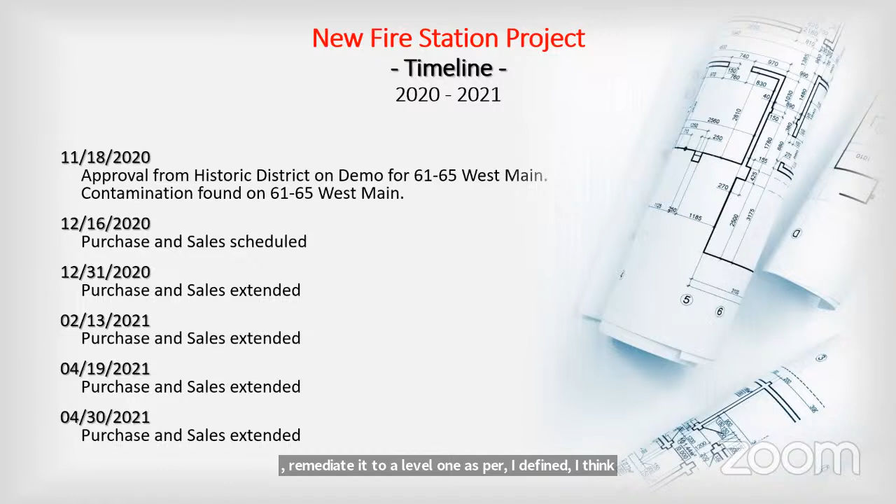At the time, the purchase and sales was drafted in such a way that the owner had to give us a clean site, meaning all the buildings had to be torn down. He could do it much cheaper than we could. And he had to remediate it to a level 1, as defined by DEP. So we had all these delays.

Finally, in 2022, the purchase and sales was executed for the property at 61-65 West Main Street. That was about 3.41 years after the town meeting approval. So it took us quite a while to get there.

We got to 10 Monroe fairly quickly, didn't take us a whole lot longer. Then the Fire Station Building Committee took a little bit to get up, but we had our first meeting in 2023 on 3/20. We hired our owner's project manager, who was Collier's.

And then we went through our process for an architect, and we hired our architect, who is HKT, represented here today. That was a little over 4 years after the town meeting approval.

So the timeline after that was, we started our program development, which was discussion with fire department leadership, survey of department personnel, space needs, that type of thing, and then began our schematic design phase. That included Fire Station Building Committee meetings and joint meetings with design review and master plan implementation and public input meetings, and then individual meetings with design review.

That led us to our next phase once we hit the end of schematic design, which is design development, which is where we are now. That again includes Fire Station Building Committee, Design Review Committee, ZBA committees, the meeting we're here for tonight.

So why do we need, that's how we got where we are. Why do we need what we're asking for? Well, the current station we're in was designed in '74 and occupied in '75.

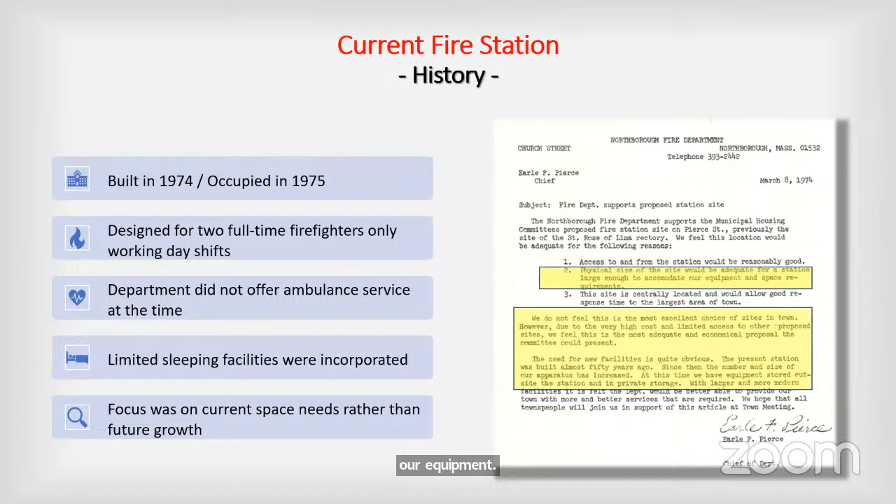At the time, they had 7 pieces of apparatus, and Chief Pierce stated we can't fit all these apparatus in our station, so they built a new one. Currently, we have 18 pieces of apparatus. We can't fit all these in our current station.

Quite a few of them are either out back or in the garage, or when myself or the deputy are there, our vehicles are outside. Car 3 is always outside. We just cannot fit them in the current station.

The ones we do have in the station look like this, and I think some of you have been down there and walked around and seen it's bumper to bumper. The only way to get from bay 3 to bay 4 is actually to crawl over the top of bumpers or open a door. We have equipment that should be stored in a secure area, our diving equipment, and it's stored in our back room with our water heater and our generators. That's another look at the front of the station.

One of the other big reasons we're looking for a new station is that many studies have occurred and they've determined that around 60% of firefighting line of duty deaths are due to cancer. And yes, we know as firefighters that when we take the job, we're exposed to all kinds of nasty stuff, and we understand that when we're on the scene, we're exposed to nasty stuff.

We follow a lot of the things that they indicate here that we can do. We make sure we're always wearing self-contained breathing apparatus. We have stuff on scene to clean ourselves off with, and we wash our gear. We have 2 sets of gear for each person. We have a gear washer and a gear dryer, and then we maintain records of every time someone's exposed.

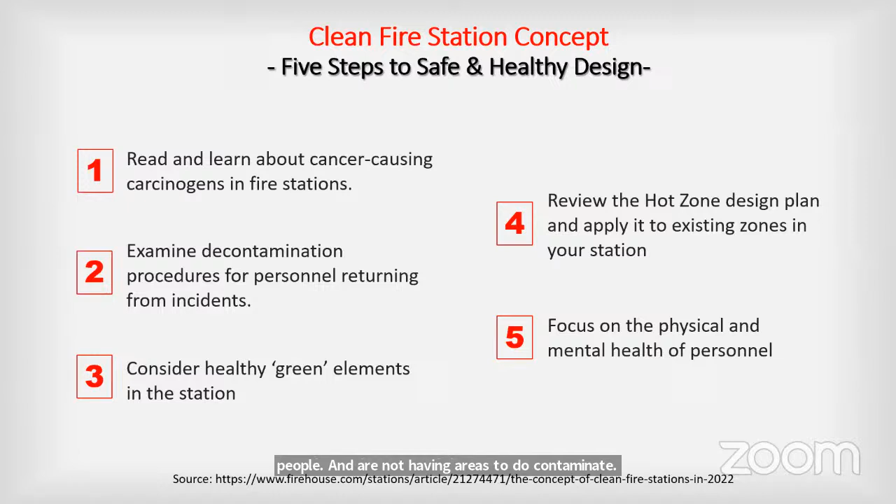That's the off-gassing of the turnout gear. That's the way the fire trucks start up and all the exhaust comes out and fills up the fire station, and people basically live in a garage sometimes. It's maybe not having good decontamination procedures for people, or not having areas to decontaminate, not having good healthy green elements, and not having a station that's designed with a hot, warm, and a cold zone.

So this is what a hot, warm, and cold zone looks like. This is actually the breakdown of our current, our proposed station. The hot zone is the apparatus area, and the areas to the left, that's the area where all the contaminants are.

The warm zone is kind of a transfer area. It's where our gear is stored when we're not using it. That's where our decon area is, where our training tower and our reports room are. This is where the firefighters are going back and forth from the dirty room to the hot zone to the warm zone. And then the cold zone is the administration area, all the living quarters. Those are all the cold zones.

These are not only separated by actual construction features, but they're also separated by airflow and by the way the station is designed, and the way the system is designed to move the air around and to keep pressurized areas. So I just wanted to clarify a couple of things that have been out there.

Some people are concerned, well, what happened to the plans in 2019 and how come you made it bigger? Well, we did make it bigger what it was in 2019. In 2019, it was 26,420 square feet. Right now, we're at 30,850 square feet. Several things led to that.

One of the big ones was we had to add an elevator. There was not an elevator in the original one. We're required to have an elevator. We're a municipal building, we have to meet ADA. We had to increase the apparatus bay size because it wasn't done correctly for the size of apparatus we had. The design was done with measurements off of our GIS system, not with a true survey. That made a huge difference when we did a true survey.

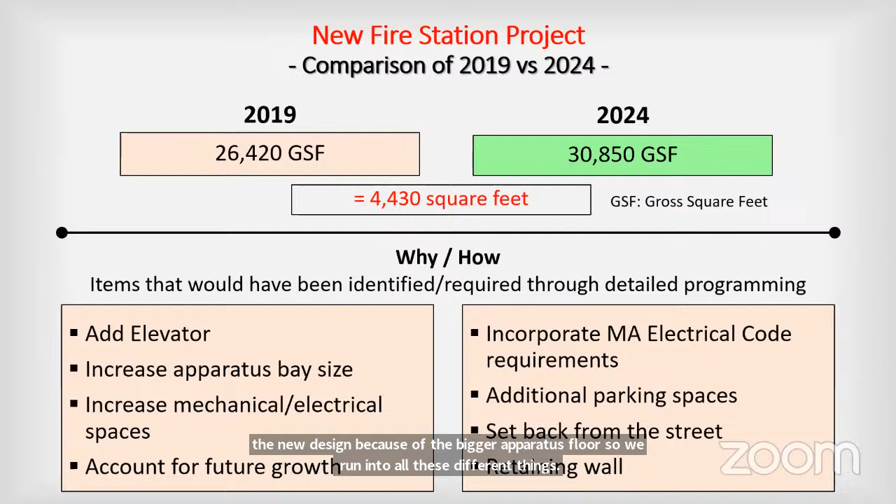What we've run into from 2019 till now is a new electrical code, the need for additional parking spaces, and a need for a retaining wall because of the new design, because of the bigger apparatus floor. So we've run into all these different things, and that caused some issues and some additional costs. So that's where we are now. Where we're going forward is we need to go through with the planning board. We have to finish up our design development and get a price on that.

Every time we move forward with a different section of the design, the price gets refined and tighter and tighter. During schematic design, we're very broad, and the cost estimators have to guess at some things because we haven't made decisions yet, and neither have they. As we go into design development, which is where we are now, we can get much clearer and tighter, and we're hoping to get those numbers closer.

We've developed the site, nb-firestation.org, which has all of our frequently asked questions, our progress updates, every meeting we've done, every presentation we've had. There's a lot of great information here, so we really recommend people take a few minutes, go here, see what we have, and that's the best source for information right now.

And that is my presentation.

Great, just to give you a little background, thanks for walking through that, that was great. Is it Amy? Are you presenting the site plan itself? Actually, Jim Jackson from PAR will be presenting the site plan. I'll present the architecture when we get to that.

Good evening, my name is Jim Jackson, I'm with PAR Corp, I'm a managing engineer. We're doing the civil engineering site design on the project. Also have Nicole Capistran, project engineer with PAR, available too. But I'm going to go through the civil plans now.

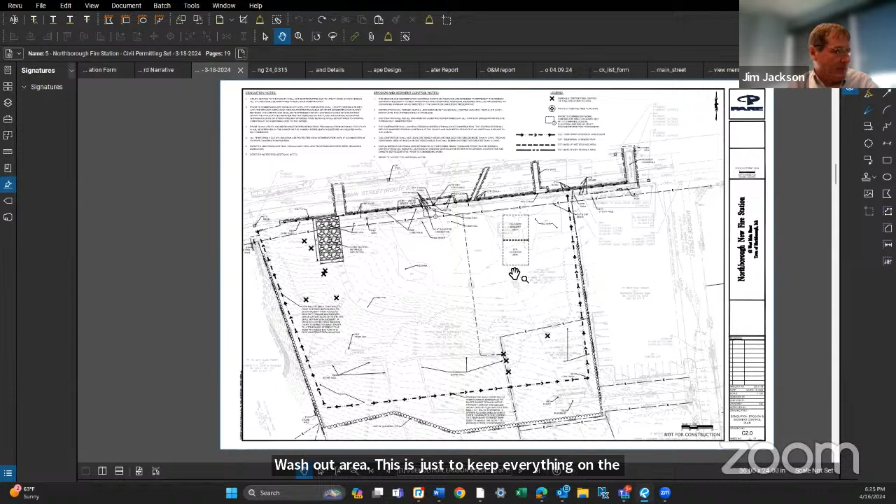This shows the general plan. So here's the 30,000 square foot building. The portion on the east is the apparatus bays, so we show a large apron for the apparatus to easily maneuver onto West Main Street. And then on the west side of the site will be the administration portion of the building, living area, that kind of thing will be on that side of the site.

And the site will be limited on the east, we'll just limit it to authorized vehicles. Fire apparatus will be able to exit the apparatus bay in the front. They'll also be able to return and drive through a back door into the bay and be set up to respond to the next call. Most of the vehicles will be able to do this drive through, except the large ladder trucks, which will have to back into the bay from the slab out in front at West Main.

The parking for the firefighters will be on the east side of the site. We're calling for 23 employee spaces, so we have 16 on the east side, and then a few more on the west side that will be used by staff. We're also showing 30 spaces on the west side, these will be for visitors and also for the public, so there'll be some public parking for people just accessing downtown. They'll be able to park here and then walk to the various downtown areas.

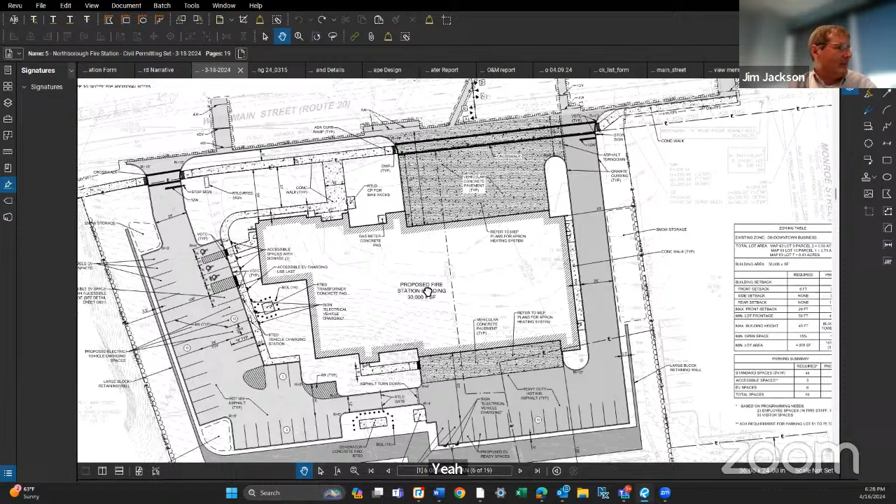We're also showing a dumpster enclosure on the back of the building area. And we are also showing sidewalks. We have them set back from the edge of the road about 9 feet in this area. We also are tying that sidewalk in the way we're showing it now into the sidewalk at the hillside grill, and that's open to some discussion. We've gotten some comments on that, so we want to discuss it a little more later tonight.

We did go through the zoning table, and we have gotten some zoning variances. One is for the setback from the front. The maximum allowed is 20 feet. We're actually going to be 39 feet back to give us some room for the apparatus to be out on the slab in front of the apparatus bay, so they're not approaching right into the street. And we have received approval for that.

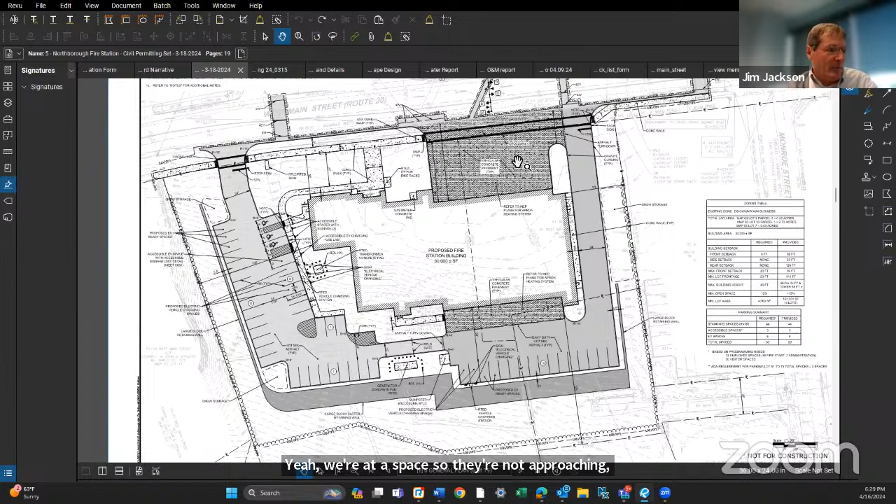General plan, that is that plan. Now gonna move to the drainage plan. So we did do a full stormwater analysis, and we submitted a stormwater report. I'll walk through the plan and show how we're accommodating the stormwater on the site.

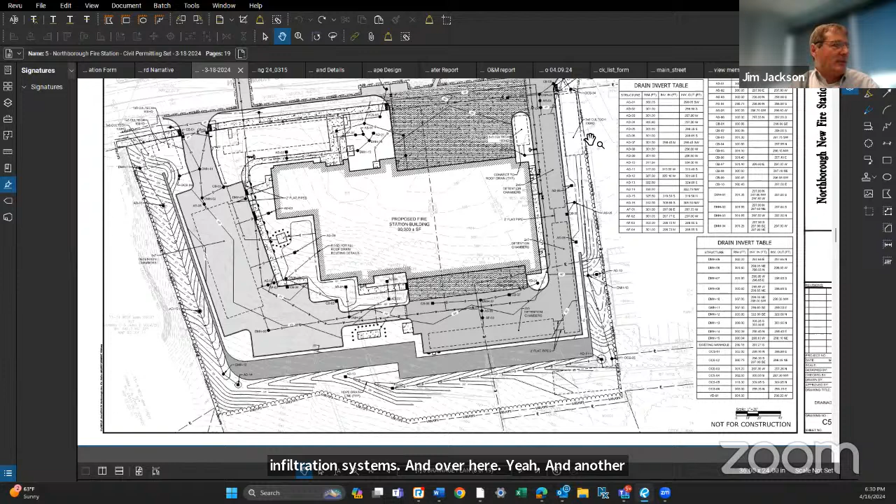So we did try to infiltrate to the maximum that the site would allow. We do have some issues with groundwater, but we were able to provide 3 underground infiltration systems, one over here, one here, and then another one here on the property line with the bank. And then also to reduce the rate of flows leaving the site, we added some underground detention chambers where we couldn't make the infiltration work in those areas. We have about 6 of those locations.

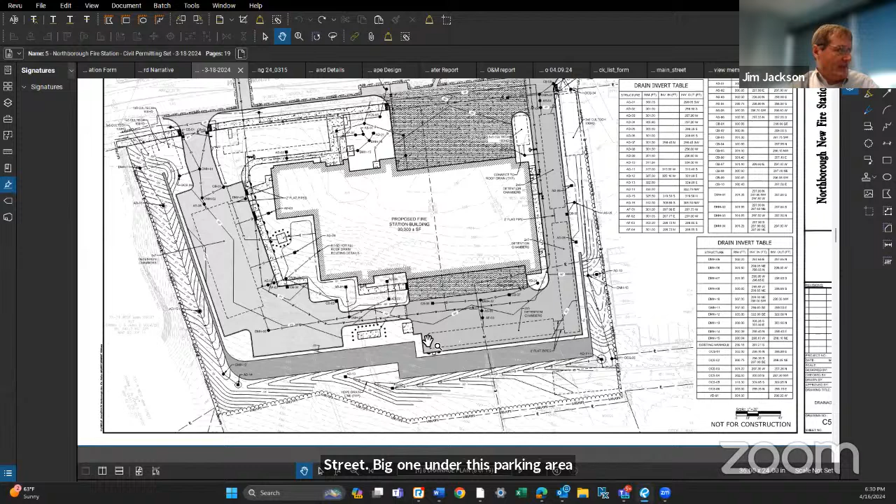Out along West Main Street, a big one under this parking area, one under the employee parking, one up the hill above the retaining wall, and then 2 on this side here. Those will help detain the flows leaving the site, so we'll be able to maintain the peak flows leaving the site under various storm events to below what the existing conditions are, so we don't put any strain on the off-site properties with stormwater.

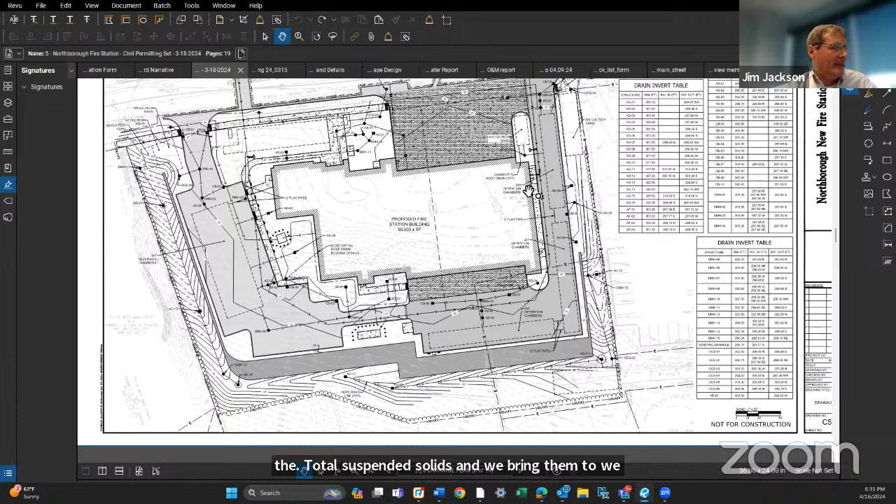And then to treat the stormwater, we do have the infiltration, but we also are showing Aqua-Swirl units before they go into the detention and infiltration systems. What those will do is there's a swirl system that will remove the total suspended solids, and we bring them to exceed 90% removal of the TSS. We've also included Aqua-Filter units, which will remove the phosphorus, and we're able to remove the phosphorus to over 80% leaving the site.

Which covers the stormwater system in general. And we do have a full report, a stormwater report, that shows the results.

For site utilities, for water, we're going to loop the water through the site on the back and then back out to West Main Street. And we have 2 hydrants on the site, one here and one here. And then we have our water service, fire service here, and domestic service here.

Sewer will be leaving from 2 areas. We have a sewer coming out of the apparatus bay, and then one coming out of the administrative side, and then they'll combine in front of the site and tie into the municipal sewer system.

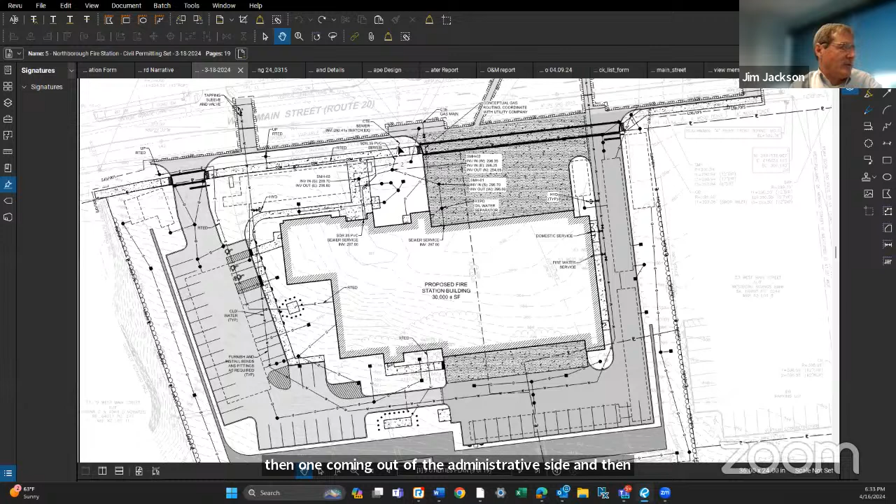We're also showing electrical will be underground. It'll come off the pole at West Main Street, underground to a transformer here, and then into the building. We also have a generator behind the building. We're also showing a gas service constructed by the gas company, right out front here.

For the civil plans, that's pretty much covers it. That's the plans, and then we have about 10 detail sheets showing some of the site details, the infiltration systems, and things like that. I can go through those and then ask a question. Just going to keep it at a higher level right now.

Amy, do you want to take over with the architectural? Sure, do you want me to call them up? Yeah, if you don't mind, if you've got them right there, that would be fine.

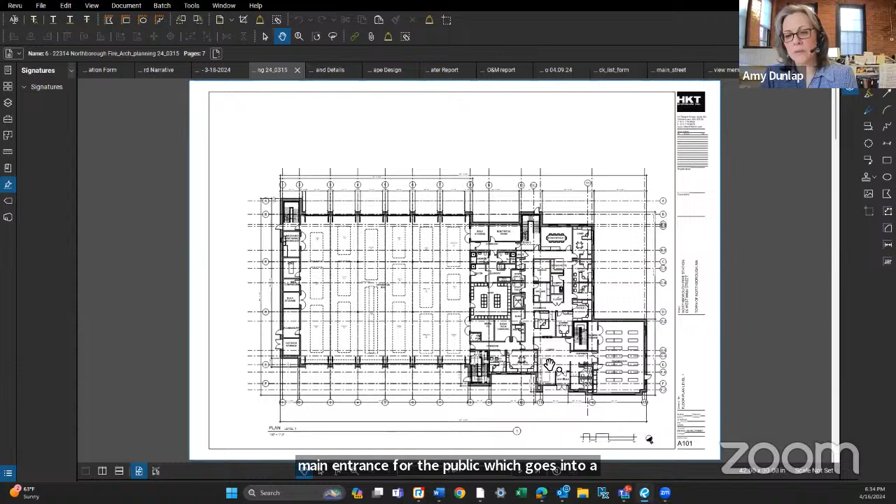So this is the first floor plan of the fire station, and the chief gave a little bit of an introduction into the way it's laid out. The entry for the public is right there - the main entrance, which goes into a vestibule and into the lobby. That is the public zone of the building. Off of that, there's access into the training room, EOC room, and some public toilets.

Beyond there, it's locked down, and you would have to be let in by the fire station staff. There's a window right there to speak to the administrator if you need help from the fire station. The rest of this floor on the right-hand side are all the administrative offices for the fire department. Moving towards the left, you get into what the chief was describing as the warm zone - a lot of the support spaces for the fire department, places like gear storage, decontamination showers, and various storage rooms and work rooms along that zone.

And then there's the apparatus bays. There are 6 bays - you can see we've got a layout of the trucks shown here, 5 of the bays where vehicles would be parked 3 vehicles deep, and then there's 1 bay that has 2 vehicles deep. That's where the ladder truck is parked.

Most of the trucks here in the bays aren't really drive-through. They're talked about as drive-through a lot, but the reality is the 6 vehicles facing directly out into Main Street tend to be the first responders. They go out first and go out the front of the station. When they return, the building's been set back so that they can back into the station without having to stop traffic on Main Street. They can do that maneuver right on the apron.

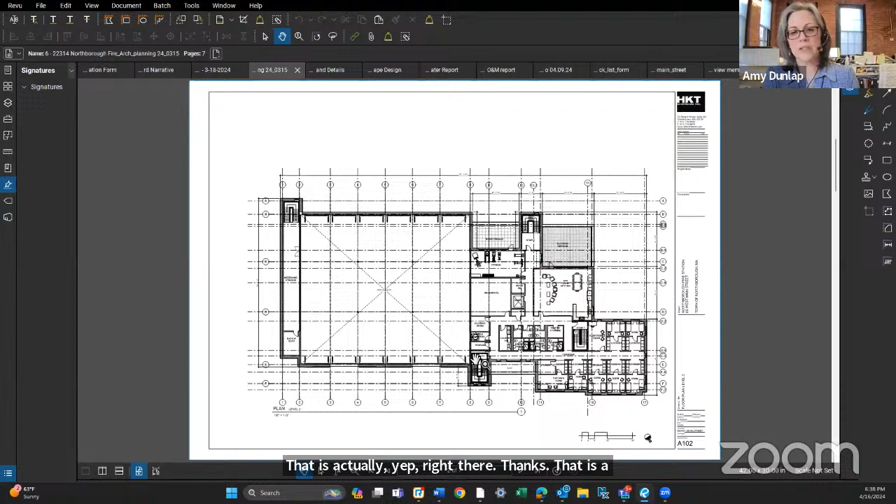In the front of the building, between the apparatus bays and the administration, you see a stair - that is actually a hose drying and training tower for the fire department. When we look at the elevations, you'll see that's a taller element, and that's because the height is determined by the length of hose they need to hang in there to let it dry. They'll also be using it for practicing and training for different exercises. The next drawing, Jim.

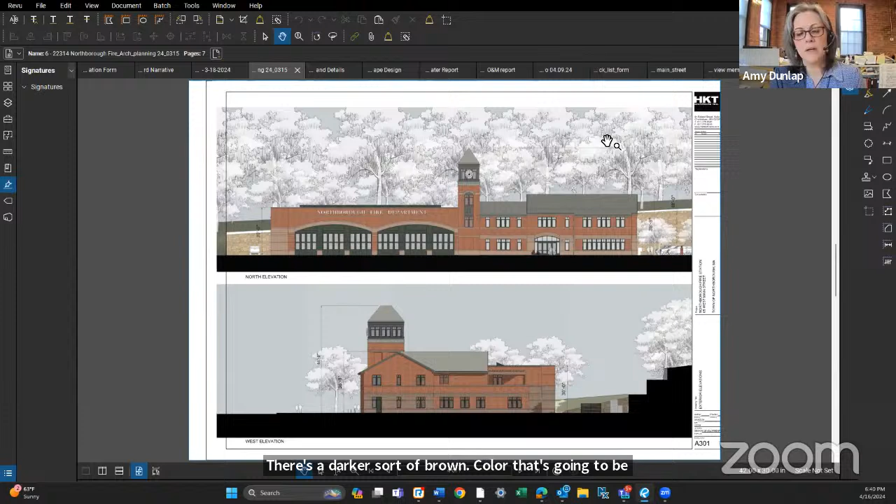The elevations, you can see it's all masonry. We have two different masonry products that we're proposing putting on the building. We presented some options to the committee, and they've selected two different brick colors that we'll be using. There's a darker brown brick color that's going to be the base material, and then the banding that goes around the building. We've got these horizontal bands that tie the different elements together, and then some arches which highlight the main public entrance into the building, as well as arches over the apparatus bays to highlight those there.

And we repeat that arch element on the tower to try to tie those various pieces together. We can go to the next slide.

In the upper drawing here is the south elevation. So that's what you would see from the back parking lot area. We've simplified that elevation a little bit. We're not showing the arches back there because it really is only going to be seen from the back parking area, and so that was a cost saving element that the committee chose.

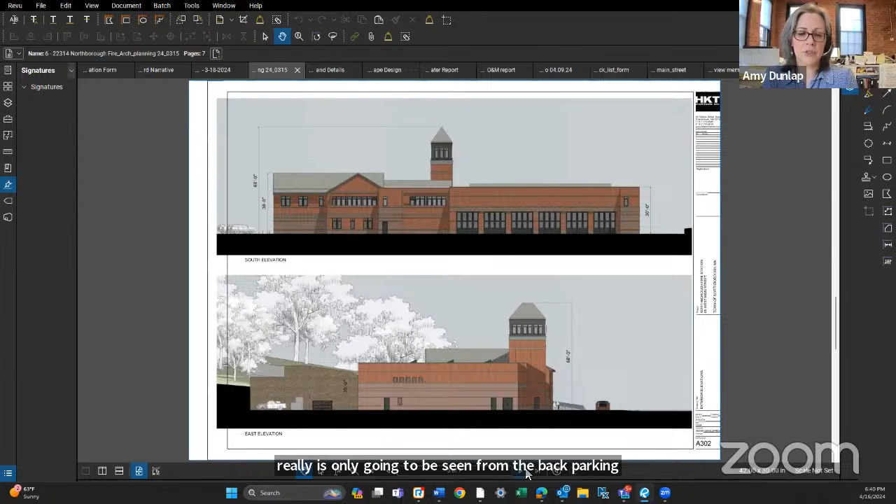And then the bottom elevation there, that's the east elevation. And that is an elevation of those storage and mechanical spaces with the mezzanine space up above. So there aren't a lot of windows there because the spaces behind it don't really allow for a lot of windows into the storage and mechanical spaces.

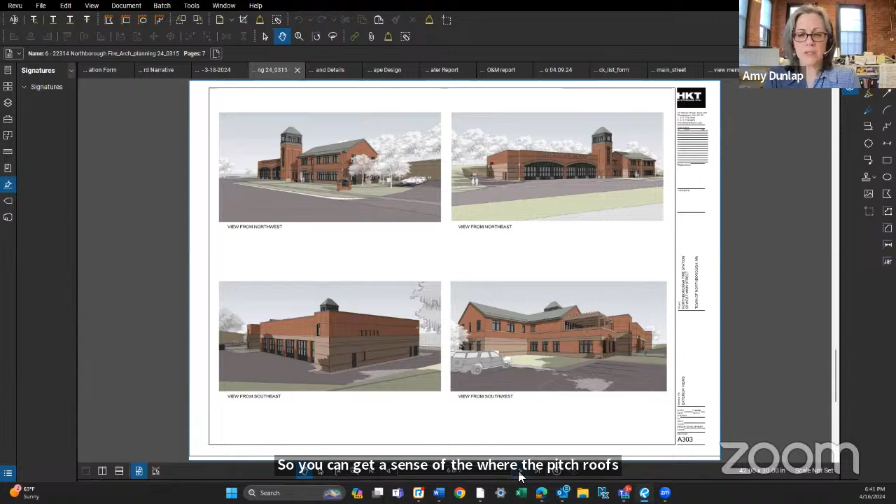And then the two bottom 3D views are from the parking lot areas. So you can get a sense of where the pitched roofs are, where the flat roofs are, and then where those roof decks are that we talked about. The next drawing, Jim.

Next drawing, Jim. I think that might be it for the landscape. Yeah, I think that's it for the architecture. We do have the landscape plan. Before you go to the next one, I think Mark is in the audience. Do you want him in with, is he part of your team too, or no? He is part of our team, but he was just going to listen in today. Thank you. Sure. All righty.

Go right ahead if you want to share the landscaping. Okay, sure. Yeah, I'm Ray Dunetz with RDLA.

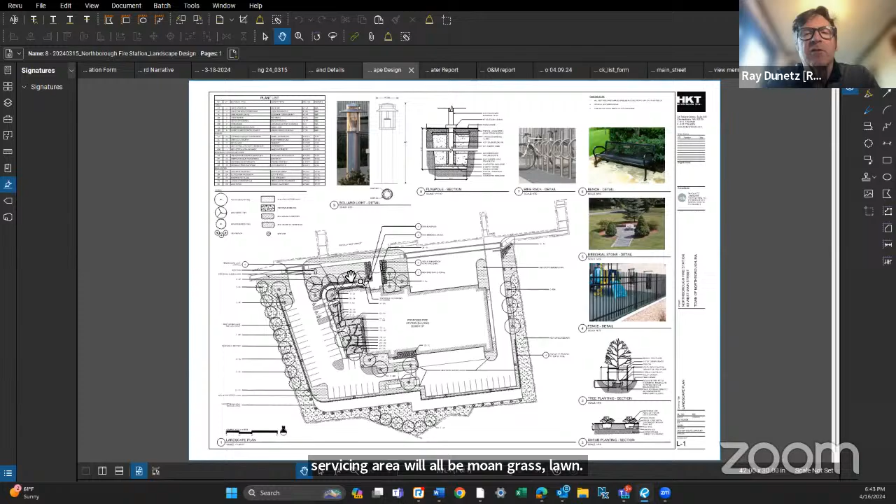We do have a memorial and a flagpole located at the center entrance. Right in that little corner there, we've got 6 bike racks and a couple of benches on a concrete pad.

And native shrubs and perennials all along that entrance to add a little bit of color, but also be drought tolerant and sustainable for the long run.

Sliding down a little bit, we have some drainage areas where we have some native plantings that can handle dry feet, wet feet, in case we get inundated with a big storm.

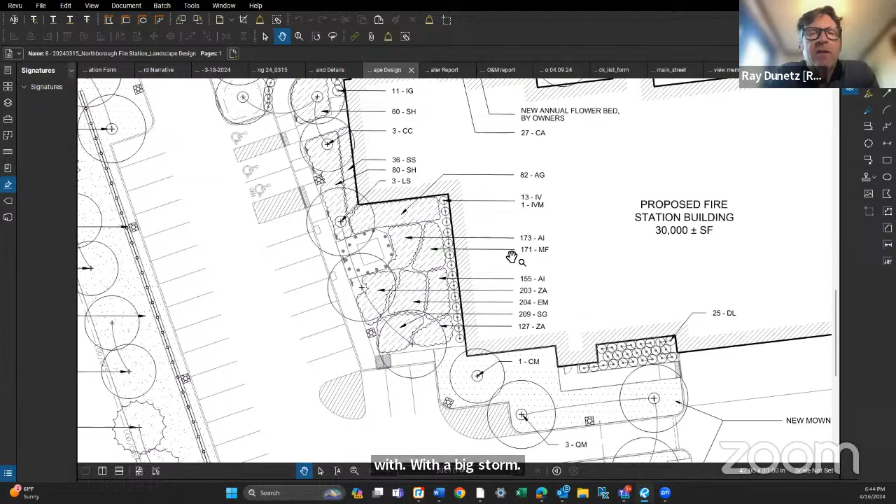The retaining wall will be fenced to prevent issues, because there's a big fall height there.

We have some images of some of those site furnishings on this drawing. If you zoom out a little bit, we're proposing a black steel picket fence. The bench would be a metal bench up in that upper right-hand corner. And the bike racks.

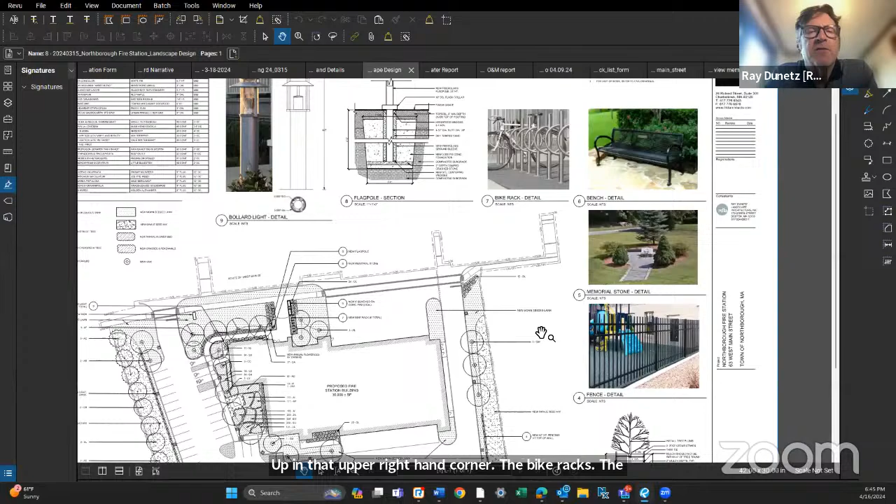The entrance from the visitor parking lot to the front door will have bollard lighting. We tried to select a bollard that fit design-wise with the building in the same language, so that bollard light will do that.

And then, of course, our flagpole detail. The plant list, if you want to review it at some point, is all native plants to Massachusetts. Once again, it provides some benefit for pollinators and is also drought resistant, and will be very sustainable in the long run.

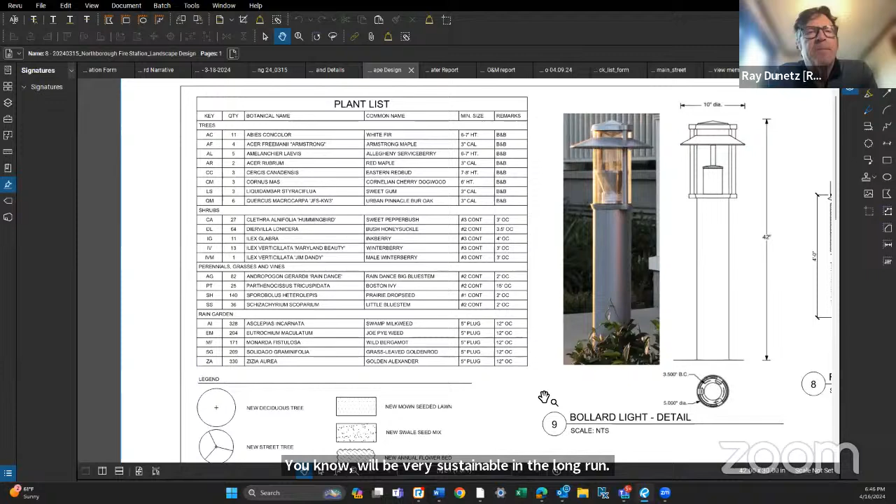That concludes my landscape piece. Know who's next?

We did also have a photometric plan showing the lighting. We don't have the electrical engineer here with us. Basically, we're showing that the developed portion of the site is adequately lit, but there's no light traveling off.

Oh, it's hard to hear you. I think you're fading out a little bit there.

Okay, I'm sorry. Yes, just showing the photometric plan. We don't have the electrical engineer here with us tonight, but we do have a plan showing that the lighting is adequate for the developed portion of the site, but no light will be leaving the developed area.

Okay. Is there any? Oh, go ahead. Yeah, and we did have a couple of things.

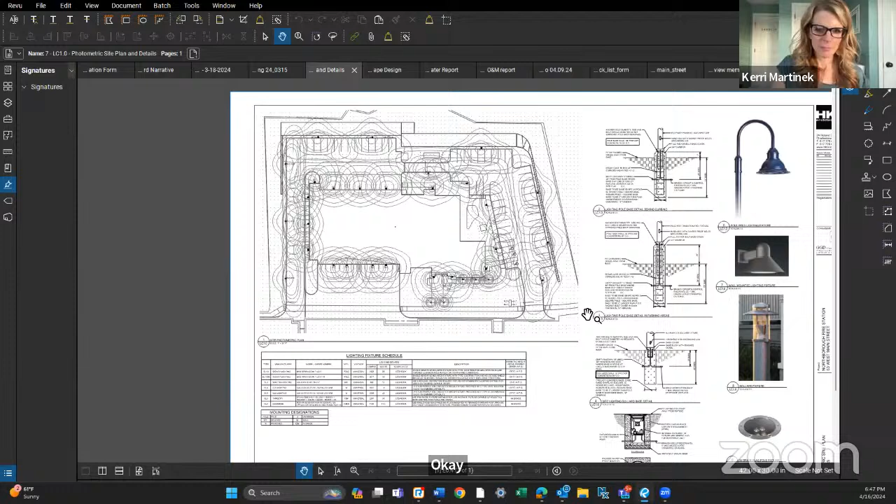We did receive some comments from Lori Connors, and then also from Fred Litchfield, the town engineer. And we did have a couple of questions we wanted to discuss with you about two of the comments. One, we were showing there's an existing crosswalk in West Main Street, and we were calling for removing it.

And then Lori pointed out that we should relocate it somewhere. So we kind of looked at it a little further, and we're of the decision that it can remain in place if you'd like to keep it. It won't be impacted by the fire station. We just didn't feel it was providing too much.

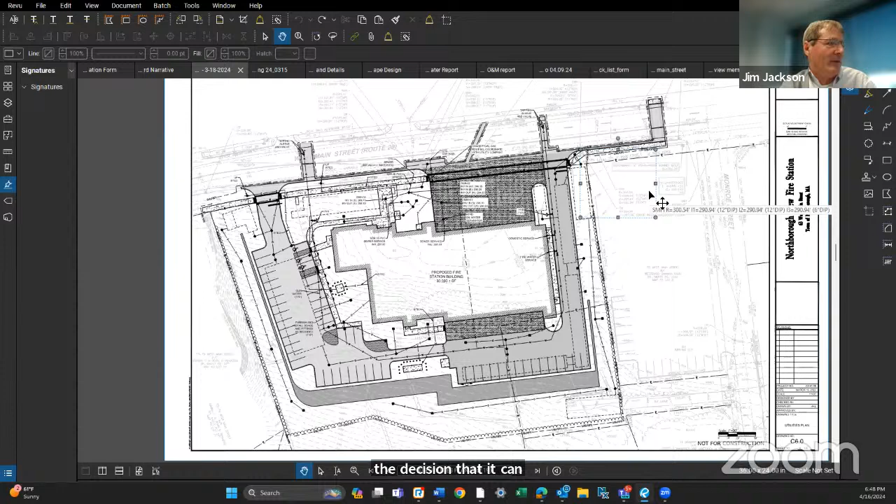But as far as getting across the street, it's probably as good a location as any to access the other side. Lori, you had recommended we don't remove it, and then I think Fred recommended we just move it rather than get rid of it. Were those conflicting comments at all?

Well, Fred and I discussed it, and he thought that the reason why they may have wanted to remove it was having something to do with the fire station. Maybe it was in a bad location. So in my understanding, he would be fine with it moving elsewhere.

I feel strongly for the position of trying to promote a pedestrian friendly environment downtown, that the crosswalk is necessary. And also I do suspect that there may be quite a few trips across the street from the fire station to Dunkin' Donuts. So I thought that having a crosswalk along this stretch would facilitate that motion. So, okay, I'm fine with leaving it as is.

My comment was that I still wanted it to match all of the other crosswalks downtown. I believe it's a stamped asphalt crosswalk throughout the downtown, so I'd still want it to be the same color and the same design as all the other crosswalks. Okay, and Fred proposed an additional crosswalk at the westerly end of the property.

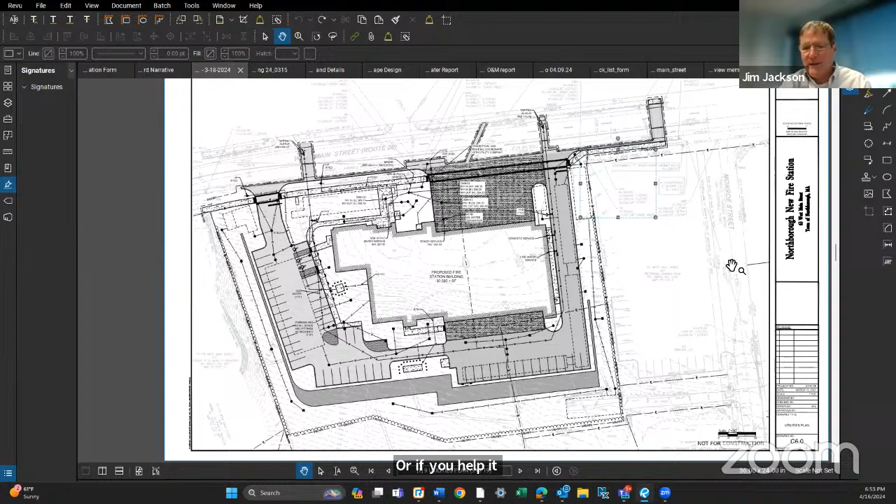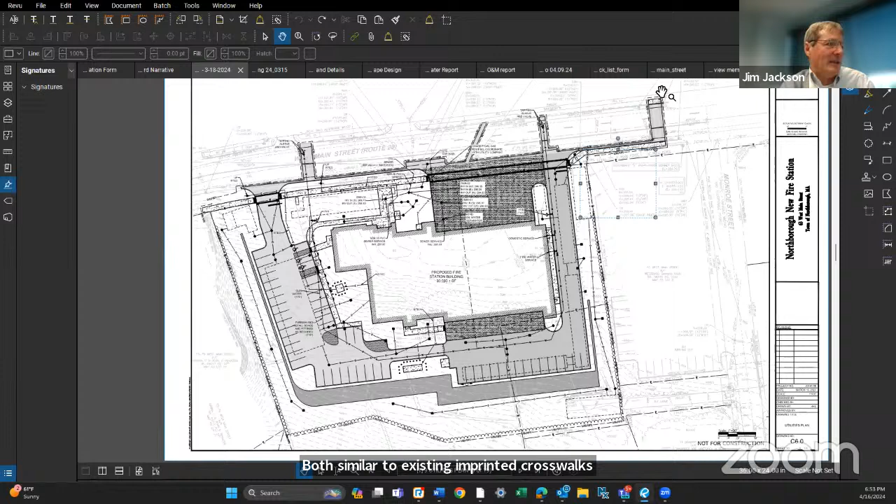That's no problem. But he had recommended a crosswalk reinstalled near the intersection of Monroe Street, and an additional crosswalk installed at the westerly end of the property, both similar to existing imprinted crosswalks. So this would be near Monroe Street, I think. Just keep the existing. It sounds like he's looking at something down that way. Okay, and you said you had a second question?

Yeah, so the other thing we've discussed quite a bit is the sidewalk at Hillside Grill. It's really not like a street sidewalk, it's more of an access from their parking into their businesses. And yeah, we've been asked to kind of connect to that. Right now we are showing it connecting, but we do kind of pull away from the street with that, so we just wanted to get your input on the best thing to do.

One option would be to just continue the sidewalk. Right now we're about 9 feet off the edge of the curb, and just continue like that, and it would dead end at the Hillside Grill property. Then at future projects, either the state or the town wanted to continue the sidewalks down West Main Street, they could pick up there. Or we can keep it the way we're showing it, where we tie into that. It's kind of a high level sidewalk, more up by the businesses along the roadway.

So Lori, I think the sidewalk was one of your comments. Did you want to speak to that?

Right now there is a sidewalk that exists directly abutting Route 20. So what they're proposing is to remove the sidewalk from its current location and put a grass strip between Route 20 and the sidewalk. That is in compliance with our design standards and guidelines, so I can understand why they did that.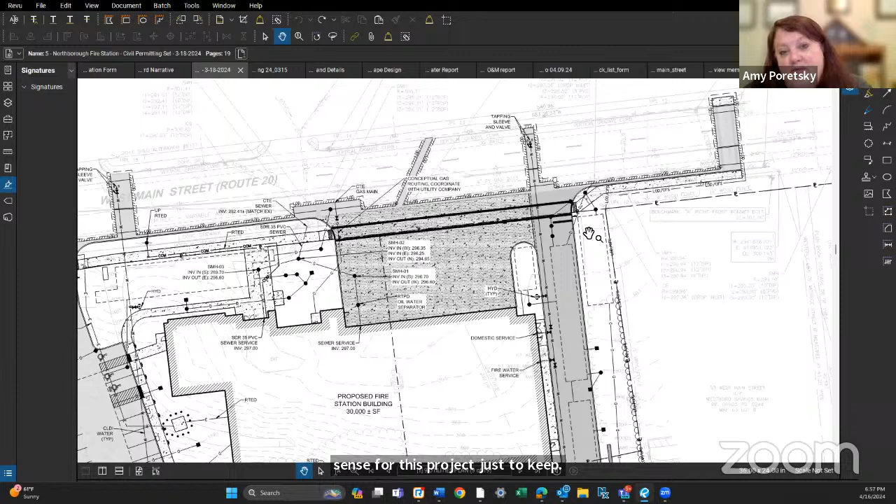Okay, so don't do the grass part was the design review's recommendation. That's what we thought, because nobody else downtown has done it. But I do thank them for following the guidelines and putting it in their original drawing.

I don't have a strong preference. Bill, anything from you on that one? I'm a little concerned—how steep is that hill going up to Hillside? On a rainy day or a snowy day, that's a pretty steep climb for that sidewalk to go up to that building.

So we were able to make it work from here to the tie-in at a 5% slope, which is considered ADA accessible if we keep it under 5%, without putting in handrails and that kind of thing. So it's a hill, it does climb up to the Hillside Grill area, but we were able to make it work within ADA guideline regulations.

And then what is it coming—do we know what it is coming back down? Yeah, so it'll be 5% each. No, but I mean on the other side of Hillside's driveway. Oh right, I think that's because you're going up by the building. So now if somebody gets up there with a wheelchair, how are they going to get back down the other side? They're going to have to come down the driveway to get to it—it ends at the driveway, I think that's the end of it.

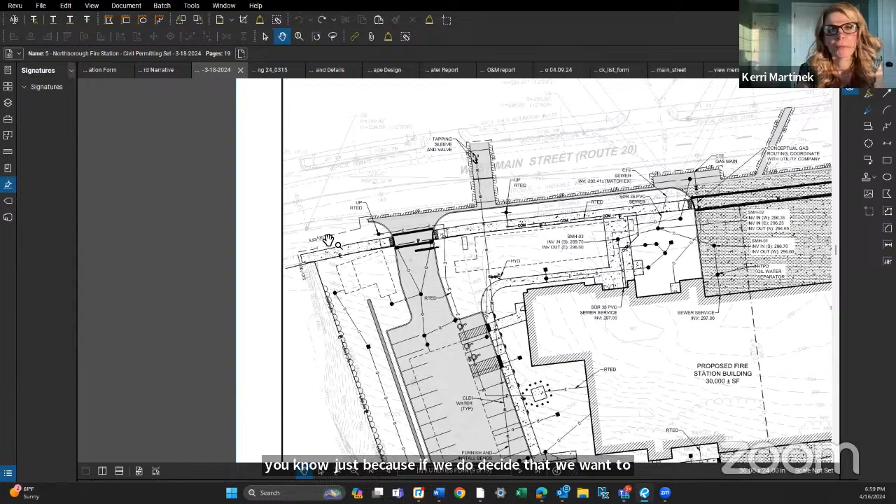What we would do is just extend it along street level to the property line, and it would just kind of dead end there. Then if future projects, if the Hillside Grill property owners were doing some work on the property, they may be required to continue the sidewalk in front of their property, or you could have a state or town project, because it is in the right of ways.

Right. So I would suggest, if the decision is to keep the sidewalk, my suggestion is for the town as part of the fire station project to extend the sidewalk to the driveway. Because otherwise we have the same condition that we have now, which is a sidewalk that's broken in several places that just dead ends at the property line and doesn't connect to anything. So I would recommend that the town finance the extension of the sidewalk as part of the fire station project.

Yeah, I would think that would make sense. I mean, it's not part of their project, but it is something that's needed in town to do it the right way.

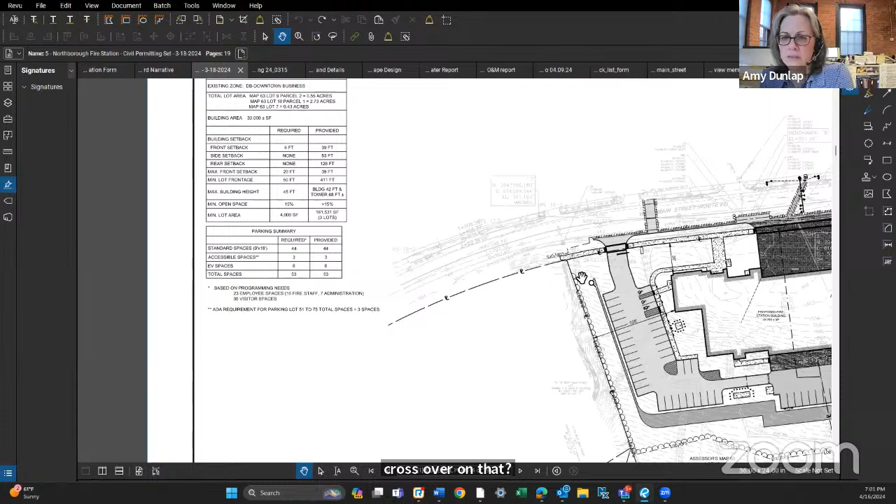Could I make a suggestion? If there's talk about adding another crosswalk across Main Street, instead of carrying that sidewalk down, would it make sense to cross over in the hillside area, cross across the street there, put the crosswalk there to connect to the other sidewalks?

Kerri, if I might. Of course, please. So actually that's something that I was going to bring up. As somebody who frequents that Dunkin' Donuts that's there, I've seen quite a few accidents there where somebody will be trying to make a left-hand turn into Dunkin' Donuts and back up traffic to the point that people coming around that corner can't see that the vehicles are stopped, and they're doing 40 miles an hour. So I'd be concerned with putting a crosswalk anywhere near that curve right there.

I'm also wanted to ask about, number one, non-emergency vehicles. I understand emergency vehicles have to come out and you're going to have a light there, right? But when you have a non-emergency vehicle coming out, does it make sense for us to require them to make a right-hand turn instead of trying to make a left out of there on a blind curve?

You're talking this entrance here? Yeah, they're trying to make the public left out of there. So, you know, we could - there's gonna be no emergency vehicle, so it could be done. We could have our traffic engineers look at it, see if it's something that we would recommend.

And you said earlier that was going to be a municipal parking lot, right? Yes, it's not just going to be for the fire station, it's going to be for anybody. So I would be really concerned about people taking a left-hand turn. That is like the worst spot on that corner that you could possibly have, and even making a right-hand turn, there are a lot of people that are going to be flooring it coming out of that building onto Route 20.

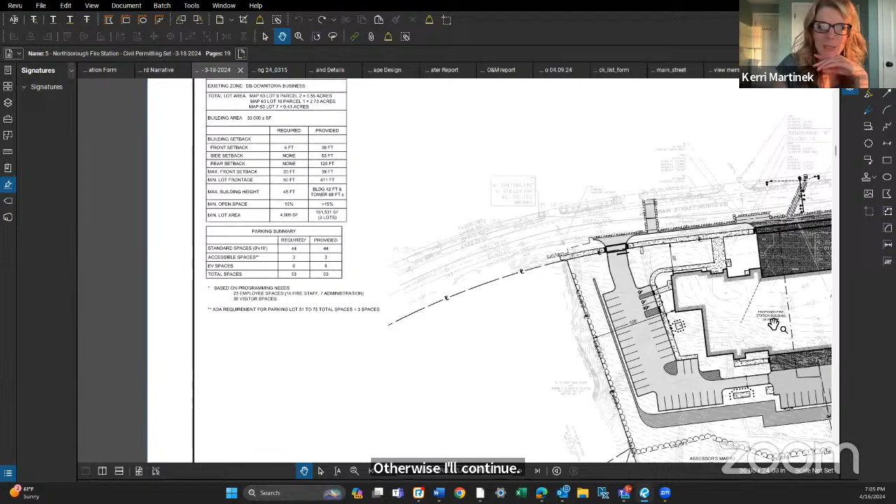Okay, did you want to hold your questions, Bill, or do you want to just go through them all? I'll hold it. If anyone else has anything along that line, I'll let them continue, otherwise I'll continue. Any others? Well, are any of your questions related to the comments from Lori or Fred? No. Okay, so would you like to continue? I think if you have some questions.

Okay, great. So the sidewalk one you answered. The EV sites that you have there, those are going to be set up - they're not just running electrical to those sites, but the intention is to actually set up EV charging stations. Yeah, so the way we have it set up is, on the public side, there's going to be 2 chargers, there'll be 4 EV stations that will be constructed. Yeah, those will be in place. One of them will be ADA accessible. And then on the fire department side, there will be 2 EV charging stations in place, and then they'll be set up for 2 more with the conduit and things if there's the demand for them.

Okay, perfect, thank you. So you mentioned - I'm sorry, could I just interrupt for a second? There are 3 more public spots across the parking lot that are going to be set up as EV ready. The building code requires us to do 20% of the parking spaces as EV ready, and the town has elected to actually put the chargers in some of them now, just to clarify. Okay, right there, great, thank you.

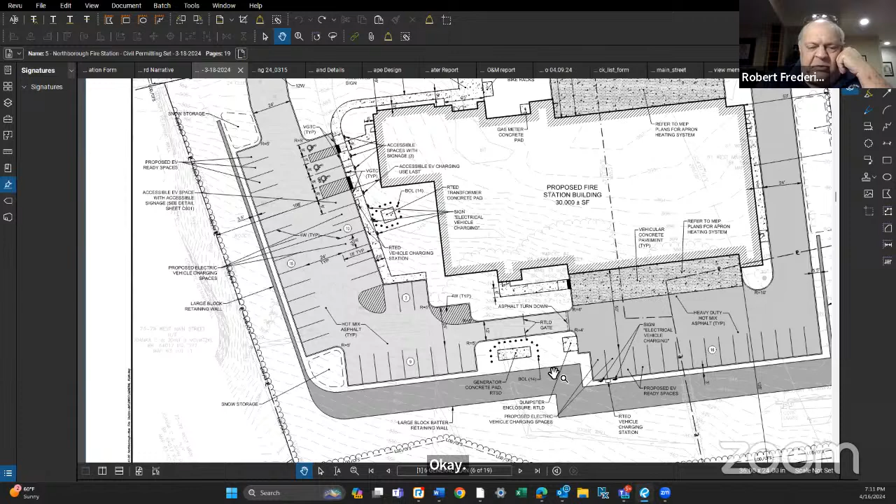Yes, thank you. The retaining wall is actually under the building code, where any retaining wall over 10 feet needs to be structurally designed by a structural engineer. This particular wall, I would feel most comfortable passing by to either Fred Litchfield or Scott, somebody with a PE, who can put a second set of eyes on it, almost as a reference I can use, also working in conjunction with the designers and the engineering team for the project. I feel comfortable doing that, but it is under the building code.

Got it. So Bob, to clarify, a structural engineer would design it no matter what, and you're just saying for it to have extra eyes would be Scott or Fred. That's correct. The building code states anything over 10 feet has to be designed by a professional engineer, which is a given. This particular wall, considering it's for the fire station, for the town, and it's also fairly complex and large compared to some of the other ones I've done, I would feel a lot more comfortable and at ease if another engineer could take a look at it, just as a second set of eyes.

Okay, that's great. Amy, did you have other items from that, or jump to Fred's? Yeah, the wall is a concern to me too, and we talked about it a little today in design review. Right now there's a 42-inch high fence at the top, and I had recommended that it at least be 5 feet. Pool fences are 4 feet, and I went up to Northborough Crossing where they have a huge wall, and when I went up there it was taller than me. I feel that 42 inches is probably too short, just because it is 30 feet high.

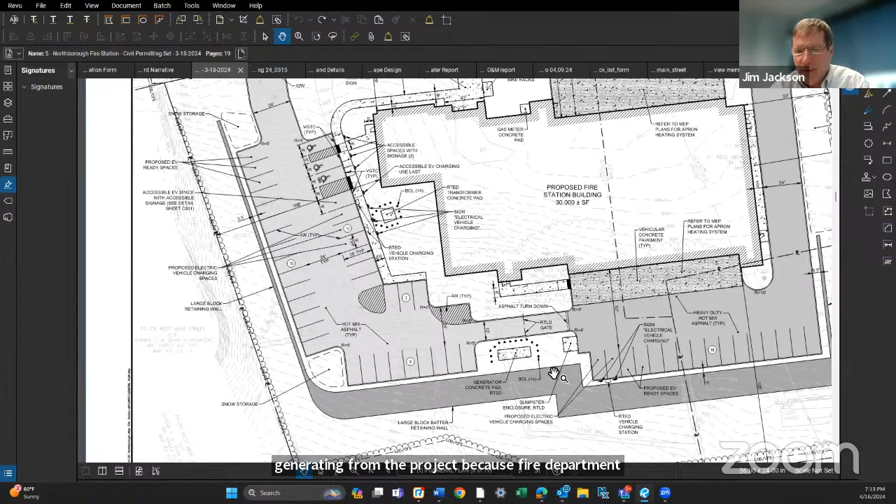I also wanted to ask about number 4, there's a discussion about a traffic impact assessment. Will there be a traffic assessment done, I'm assuming, since the engineer was just talking about it, when they do the lights for the fire station, just to make sure it's going to flow? Yes, we do traffic counts to design the light and get the warrant for the light with Mass DOT. What we're saying is we're not doing a traffic assessment of how much traffic we'll generate from the project, because the fire department really doesn't generate a lot of traffic like a shopping mall or big residential complex.

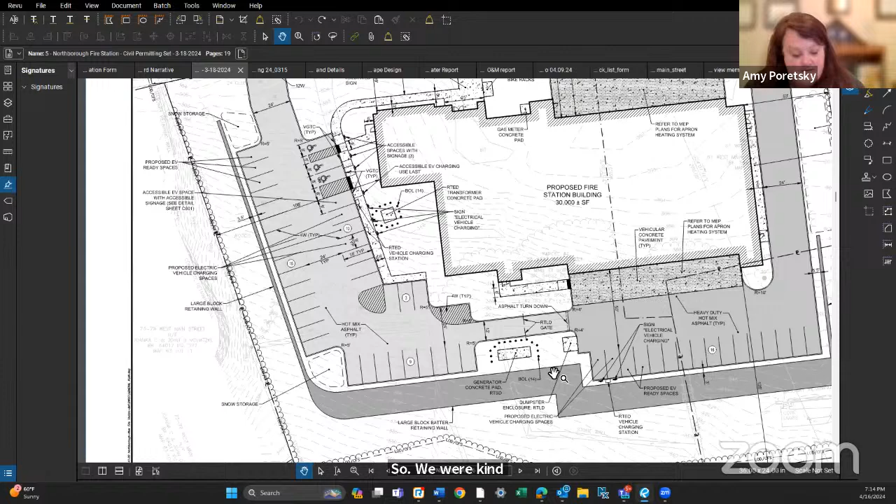Okay. So there are a couple other things probably coming from the design review, but we didn't finish yet. We're going to be looking at the landscaping, although what he presented tonight sounds like it's definitely in the right direction, and I'm sure it's fine. We just didn't get the 318 drawing. We met on January 25th and then February 29th, so we were going to have our landscape person review it quickly.

Let's see, there was a question about turnaround in that parking lot for the public. If this parking lot is full, did you have an engineer look at whether there's room enough to turn around? Like, say you're one of those cars at the very end of the parking lot and the whole lot is full and the gate is closed, is there enough turning radius for everybody to maneuver?

Yeah, so we put the gate in the middle of the access road. So if a car pulls in and finds no spaces available, they can pull in and then back into this striped area and turn around. Oh, so those striped areas, even that other one, can be used for turning around in that area? Yeah, it's just striped pavement, it's not raised. Okay, that helps, that makes sense. And then there were some things where there were some waivers asked for.

How hard is it to do the 1 by 100 feet? I know they're asking not to do it, but I know it's something, even in the design review, it shows where the setbacks are, where your abutters are, and gives you a feel for the neighbors. It shows the whole site. And I know right here, there's a waiver not to do it. Is that something that's difficult to do?

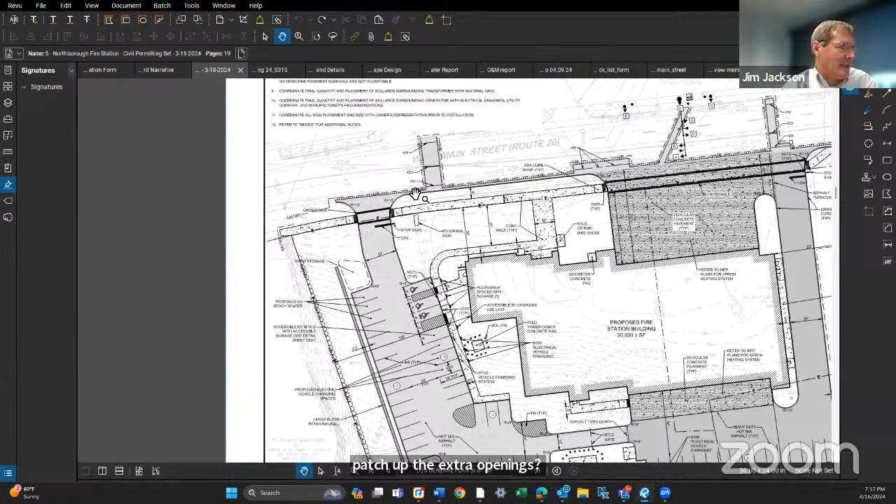Not quite sure the question, like the existing sidewalk? Yeah, like the existing driveway openings which are not being utilized shall be removed and replaced with a concrete sidewalk. But if it doesn't, I guess it's something on the fly when you're out there. If it's kind of a crummy sidewalk right there, do they replace the whole thing, or do they just fill in the spots? The intent is to replace it all, property line to property line, the sidewalk running.

Yeah, Amy got disconnected, but I would definitely replace. The whole site is going to be under construction, and we're not going to try to save 5 feet of sidewalk. We'll replace it, so when we're done, it's a nice complete project versus patchwork. Yeah, there won't be any patches.

Okay, I think that's all for now. So along the lines of Fred's letter.

I have a quick question, Kerri. Amy is back online, but she's in the audience. Could you promote her back up? Oh, yeah, she got cut off, and she's been trying to get back on. So thank you, okay, and it's Amy Poretsky.

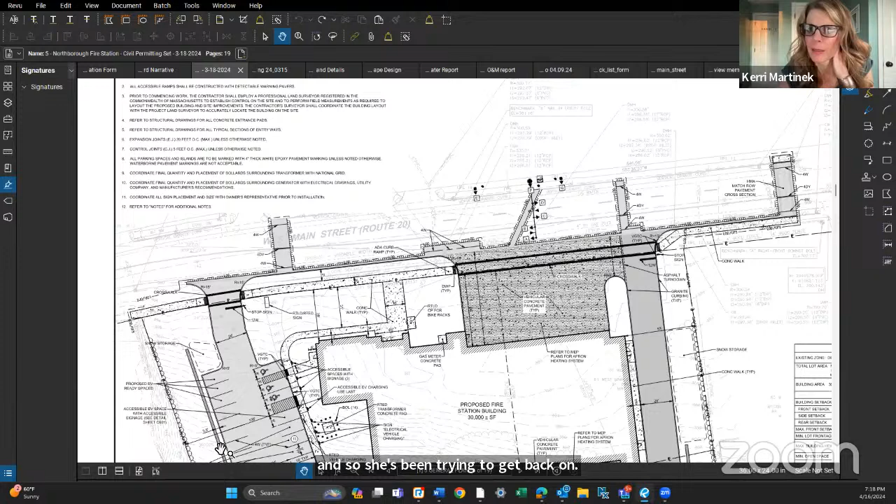She's on the way. One thing while she's joining too is we had discussed the snow at design review, and there are a lot of snow areas, but if it filled up too much, the chief had talked to Scott at DPW, and he said that the town will remove it. So we just recommended that we get a letter in stating that for the planning board. And I think the chief or Lori was going to reach out to him.

I did, I sent him a message. I haven't received a reply as of yet. Yep, thank you.

Okay, and so Fred, I know we got this letter late in the day, so I don't know if there's any comments you want to address now, or if you want to take time to look at it and come back with replies. I mean, obviously you saw the one about the waiver that was not recommended, a couple other things in here as well that Fred had commented on. So anything you want to speak to about it, or do you want to take some time to look at it?

Yeah, we can review it, and then if we have any specific questions, we can just contact Fred, but I think we can probably accommodate his comments. That extra crosswalk we may want to think about, to keep the existing one, but I think the others, okay.

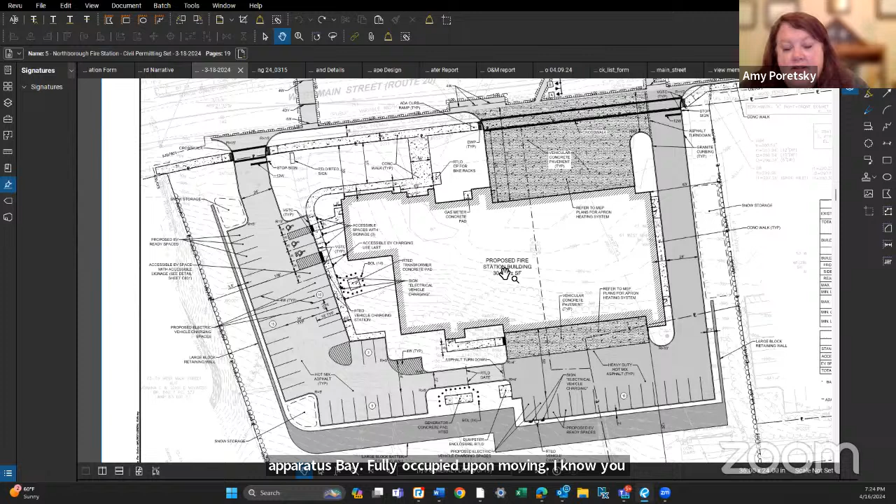Before I open up for public comments, Amy, you have something? I just had one more. I was wondering, is the apparatus bay fully occupied upon move-in? I know you said we went up to 18. Yes, it's fully occupied, but there is room, so it's not like it is now with the trucks stacked on top of each other and all pushed in.

That's not going to be the case with this, right? So we'll have room in between the trucks. All of our apparatus will be able to get inside the station.

I was just thinking, you talked about expansion for the next 40 years, like if they needed newer, bigger trucks and needed extra trucks, with the wall, is there any place to expand on the site?

I don't foresee us needing any more trucks. I see truck sizes changing, but when that happens, you lose one truck and get another. I don't see trucks getting to the point where we can only put one per bay or whatever. We also currently have trailers that we use that will eventually age out, and we may not use those anymore, which will open up additional space inside.

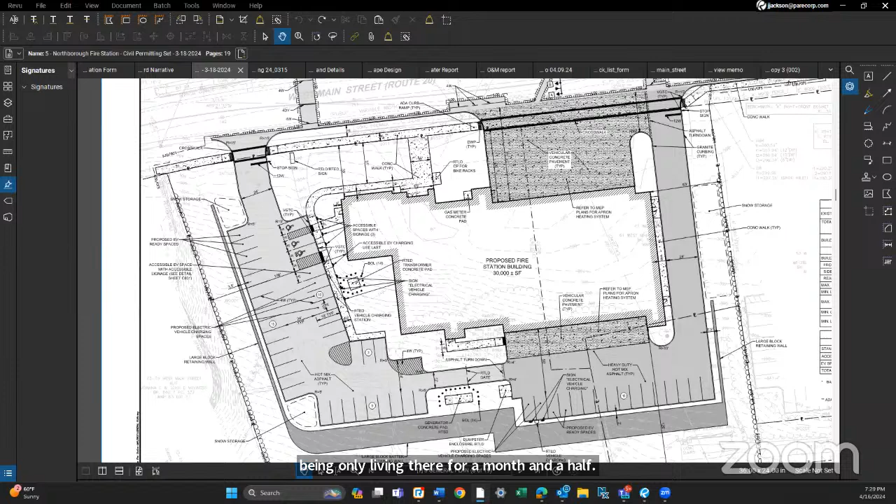So those are where my concerns are coming from. Again, trying to catch up after only living there for a month and a half. It's really been a struggle, but I appreciate the opportunity to comment. And thank you. Great, thank you. Thanks for your letter as well.

Okay, so I guess Grace had obviously sent in the letter that I referenced earlier. So thoughts from the board on that, or comments, or from the applicant at all? Has there been consideration to the point about making sure, looking to the abutters and trying to make sure it's as good as it can be in the flow of where it is? Has there been that consideration at this point in the current plan?

I can only say that the public parking is as far away from 20 Monroe as it could be on the site, and that is one good thing. We had originally planned for it to be on the east side, and it was moved to the west side, which is all abutting the commercial property. So I hope that helps.

The parking in the rear is for the fire department. Once they come in for their shift, they park and don't leave during their shift, so they live there. The frontline vehicles will leave on the west main, out of the northern elevation rather than the southern, but obviously there'll be trucks, as the chief pointed out. They don't have to have their sirens on until they're well off the site.

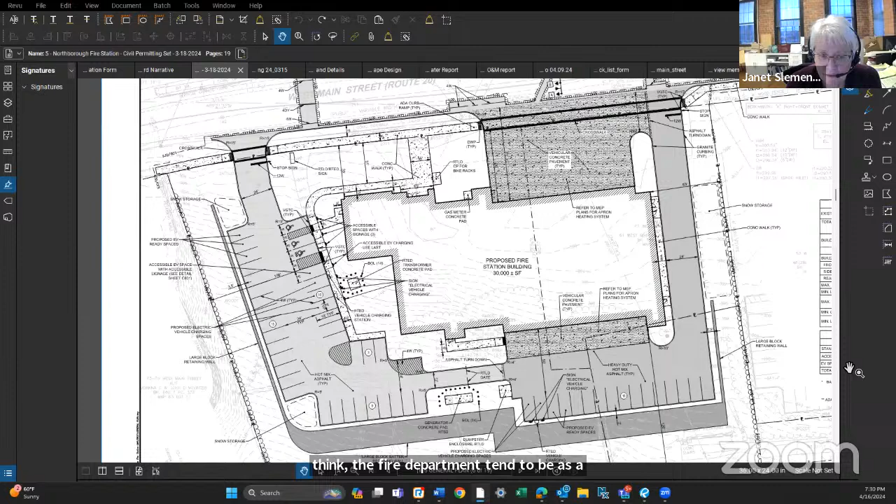I think fire departments tend to be, as a whole, relatively tidy people. They stay there, they make sure the site looks good. I don't know what trash we're worried about. We do have a dumpster enclosure, so all of the stuff generated by the building itself will be contained. So I think that's all I know now.

We just got the letter ourselves, so we haven't had a chance to really digest it. That's okay, all right, that's it. So, all right, Mitch, you have something there?

Yeah, just to add to that, it probably would not be within the bounds of the construction project to look a year later, or even more than that, to check noise and everything like that. The benefit of this is it's a town-owned facility, so as a town we have a responsibility to be as kind as possible to our neighbors and to address issues later. I can't think of a way that we could do something like that and still close out the project the way we'd want to.

To budget for the architects to stay on board for a year or two after completion. But none of us want to be overly disturbing to neighbors.

I can also tell you from my own experience, I live pretty close to the existing fire station. I'm not a direct abutter, but I'm not too far away. It's not very noisy, very rarely do I hear sirens or anything like that coming from the facility. Usually if I hear a siren, it's coming up my road as opposed to from the fire station.

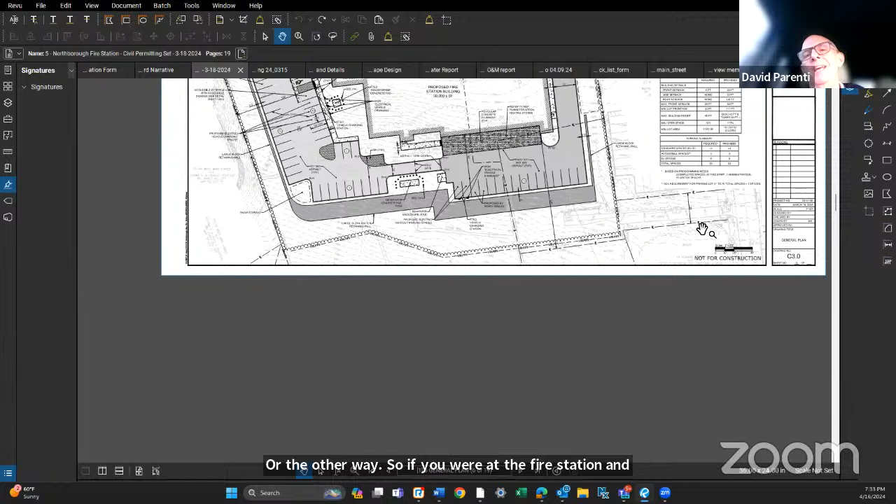The current station wouldn't be a good option because we don't exit right onto the main drag. We come out onto Pierce Street, then turn right, and we don't actually have issues normally until we hit the intersection of Church Street or the other way. So if you tried to get an ambient noise reading every time the fire truck leaves, you'd get nothing. It wouldn't be an accurate study.

And plus, now I'm thinking they are explicitly exempt in our bylaws, any sort of safety vehicles. Even on Bartlett Street, weren't the vehicles exempt? Certain safety sounds, like the reverse beep, all of those things are exempt from the sound regulations.

Right, but I'm thinking more, I understand there may not be anything we can do about it, but at least get a study done, so at least we have something. So we can say we took a look at it, and maybe we do need some trees. Even though I understand they're exempt, does that give us a little bit more ammunition to say we may need some trees here or some other type of barrier?

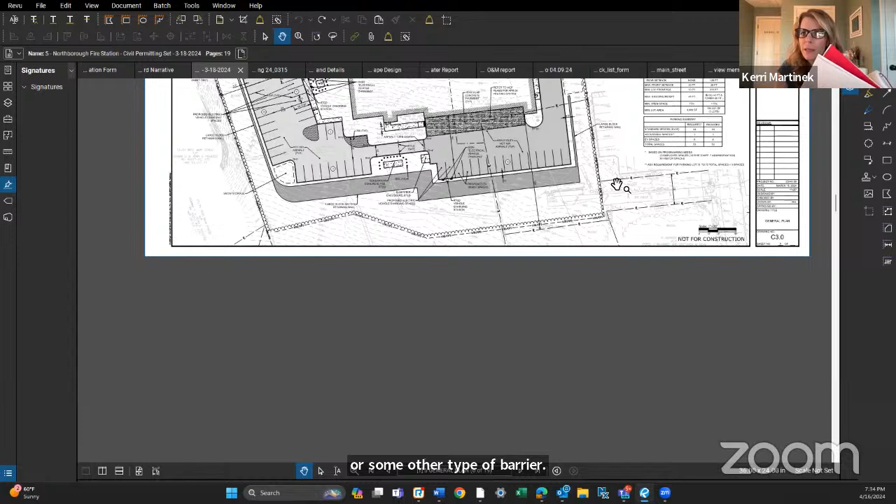Hi, Tom. Good evening, Tom Reardon, 7 Sunset Drive. I am a member of the Fire Station Committee, and I was going to point out that this fire station

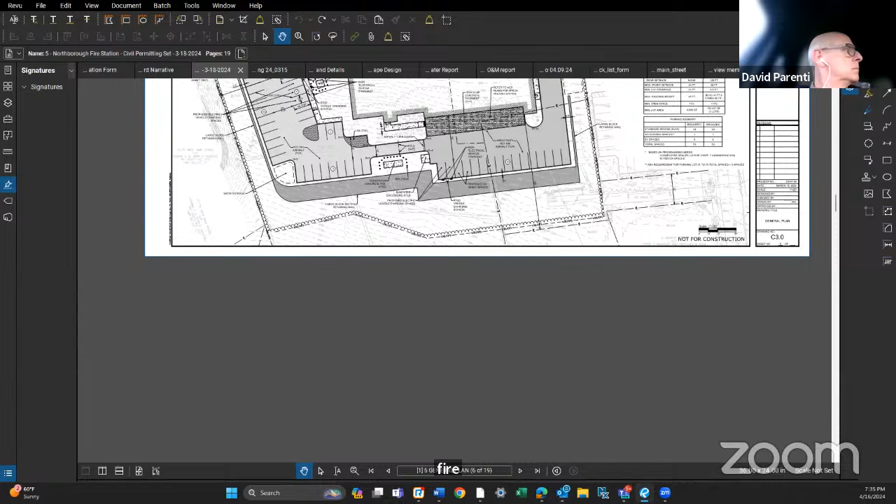is going to be on a state highway. So when you have 12,000 to 15,000 cars passing by, that's more likely going to be the greatest source of noise rather than the operation of the fire station. And planting trees will have very little effect on controlling sound transmission because you don't have enough density. You need like 100 feet of planted trees to reduce the decibel level. So I don't think using trees for acoustic treatment is feasible, maybe for visual buffering, but trees don't help very much. That's all I have to say.

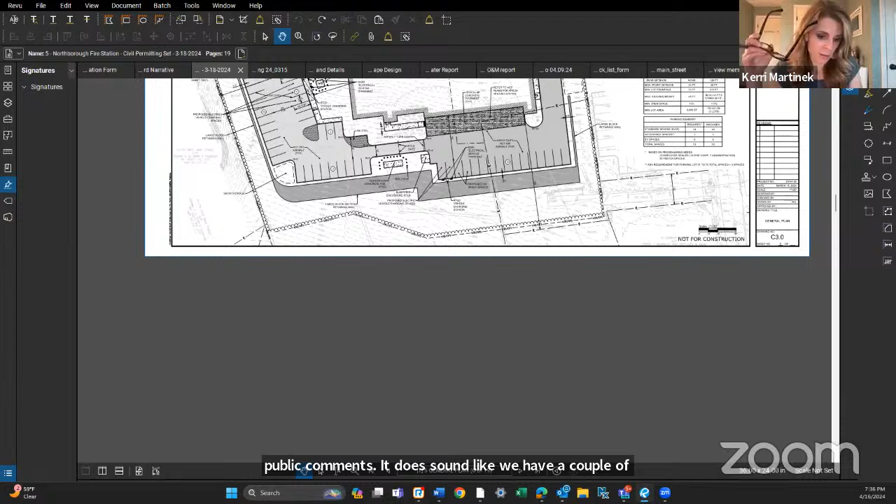Can I just add one more quick question? Oh, yeah. Sure. Sorry, I always think of something when other people are talking. And we were talking about the parking in the back.

This isn't really as much for the noise, but the wall being 30 feet high. And I know the design guidelines say you don't want, or even our bylaws say you can't have any parking in front of the building. But if you pulled the parking forward, I can't see the whole thing, I don't know if it's your screen or mine, but can you move it so you can see the street? So if the parking in the back there on the west side moved closer to the street, if you pulled that whole parking lot forward, would you be able to move the parking forward enough that you could take down some of the 30 feet of the wall? Would it make enough room that you could bring down the wall some? So if you take the spaces up there.

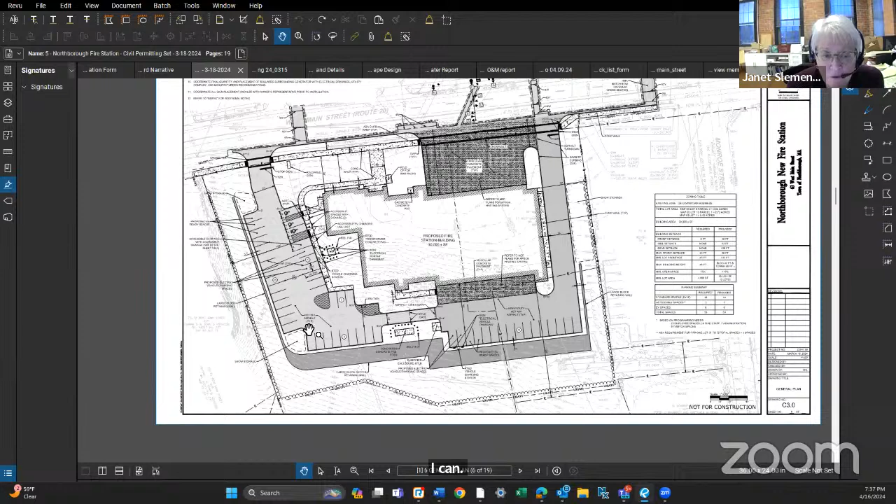I think I can take that because we've been asked that question before, and we did a quick study to see if we took those 7 or 9 spaces, whatever, right there that Jim is highlighting, we would be moving the wall forward, but we still have to deal with the transformer and the dumpsters. We only pick up about 2 to 3 feet of height. It's very, very steep there, so it doesn't give you anything, in my book, 2 to 3 feet.

We've already looked at that, and we'd have to step the wall, and then we'd have to deal with the transformer and the dumpster. The wall does change and it does drop down. You can see the grades right there: 330, 330, 332, 330. You can see how tightly bunched they are, and then how they begin to spread apart a little as you go east on the property. 327, 326, 325, where it kind of zigzags behind the generator and the dumpster pad. So we're picking up 2 to 3 feet, and I don't think that's definitely the way to go on it. It would make the detailing even more complicated to continue stepping it every time we go down a few feet. So we did look at that before.

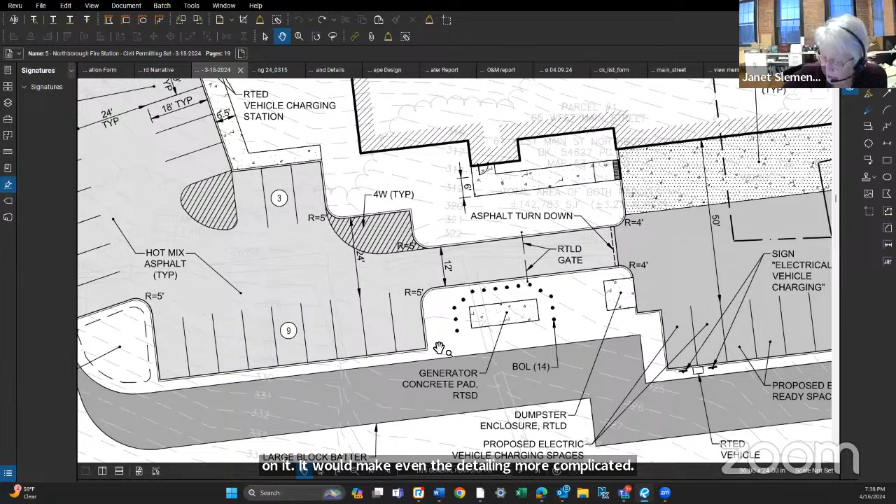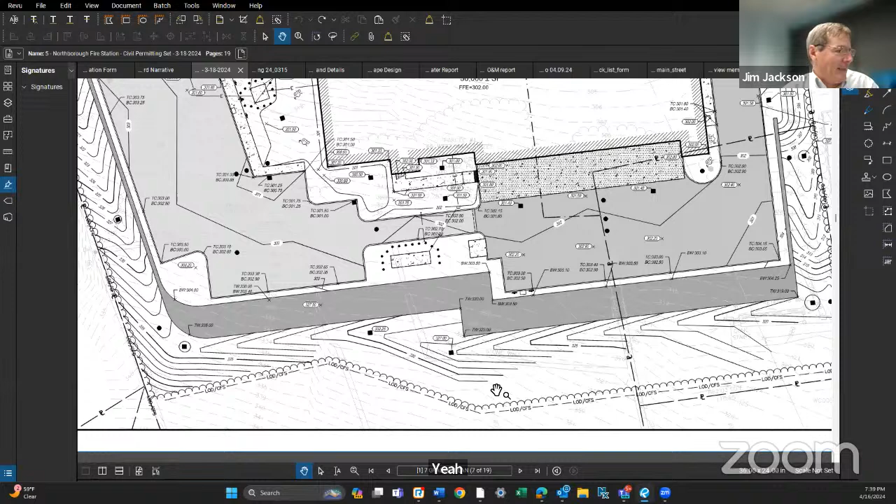And the terracing wasn't chosen because it was too expensive? Yes, this was a big expensive add to do the terracing. I can't remember the exact numbers, Amy, but I think it was double. It was like, cost, and we were also chasing the project further back into the hillside, so it was getting higher and causing more disturbance to the tree line.

It seemed like the batter was chasing back because we had like 10-foot tiers or so. When he's saying chasing back, he's pushing further into the limits of the disturbance line. With everything, he was going back further into the site. We were really trying to maintain that line, lining up with the old driveway from Monroe Street, and didn't want to get back further into that as well.

So was that because of the parking lot that is proposed possibly for the future, or is it possibly because of the neighbors? It was - we were trying to keep it to a minimum, everything we did. But that was one of our design issues that people were concerned about.

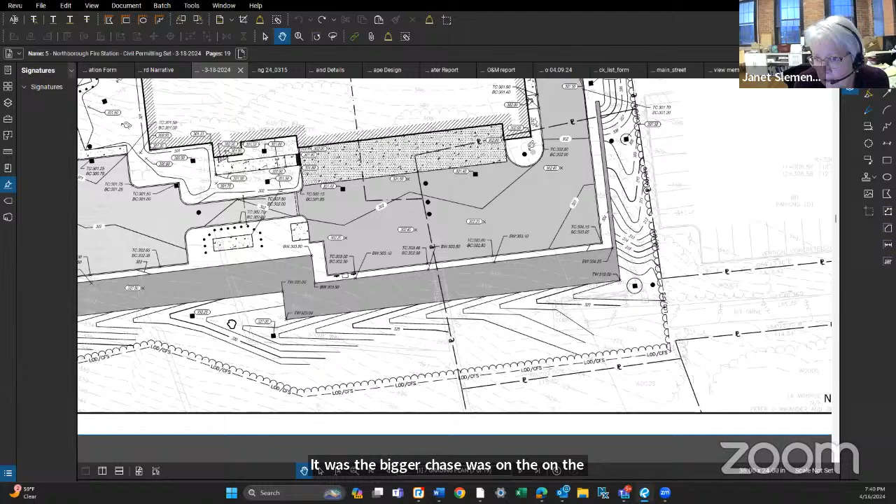The bigger chase was on the west side, though, I believe, Jim, right? Yeah, where the grades were the most complicated. Because every time you terrace and go with the level portion, you're just pushing everything back further into the hillside. So our disturbance line is the disturbance we push back. Right, and you can see the grades don't loosen up - it's getting higher and higher. They're not going the other direction. So they don't level off, let's put it that way.

Favorable for anything else, so. Okay, any other comments?

All right, so we do have a couple of outstanding items. We're going to continue the hearing - we need to figure out a date to continue the hearing. The next available planning board meeting is May 7th. Is that too soon to do what we need to do, or? The next planning board is May 21st, we heard, a date of May 21st.

Is that also a meeting date for you? Oh, yes, it is. So, yep, that's the next one available in May. So we have it on May 7th and the next one's May 21st.

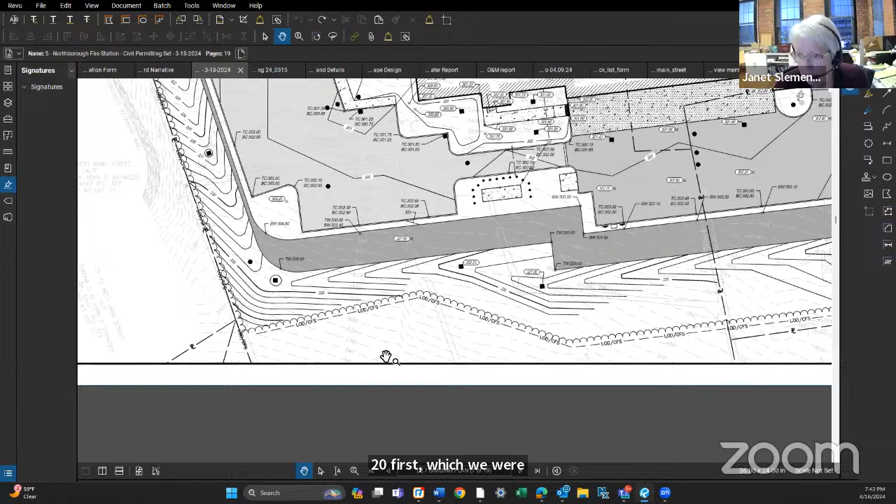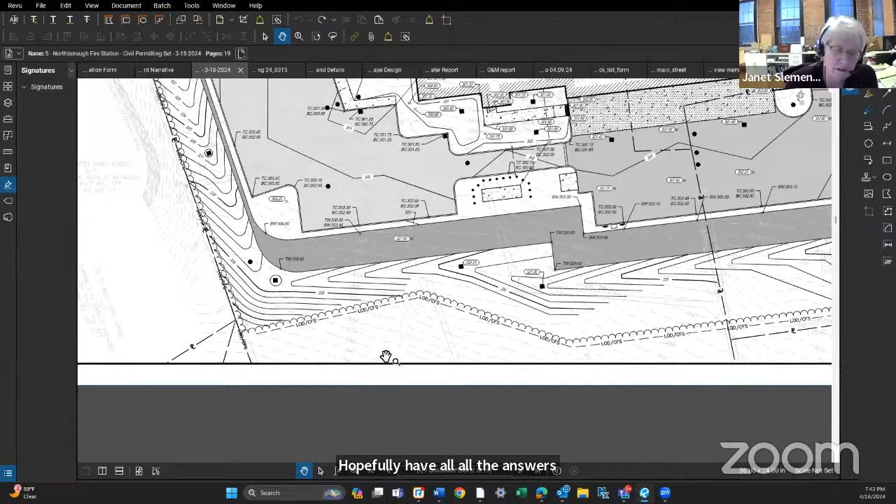So we've spoken to Lori and set up the master schedule for all the meetings we have in May. For May 21st, we will be required to get drawings in by May 14th, which gives us a couple three plus weeks to answer and deal with any questions that come from the professional staff, Bob, Lori, anybody from the board itself. We'll certainly speak to Fred and try to resolve all those issues. So the next time we come back, we would hopefully have all the answers you need. The sooner we get them the better, but it could take a couple weeks to get it all together, so we were planning on the May 21st meeting.

Okay, great. So Lori, question for you. Last town meeting, we voted to accept the Mullin's rule to allow for a planning board member who's not here - Anthony is who I'm thinking of. Is that something we need to declare at this meeting, or can he just review the minutes, whatever the requirements are for him to participate in the next meeting?

Yes, so what will have to happen is he will have to read a statement prior to closing the public hearing on the 21st, assuming you folks will close the public hearing that night. In his statement, he will have to attest that he watched this public hearing and reviewed all of the submittals that were received during it. Then he will sign a statement, which I will attach to the decision. Okay, great.

I know we just need a simple majority for the site plan, but since Millie's has to recuse herself, it'd be good to get a fourth member in the mix.

Okay, great, so I think we have some outstanding items. If there's no further comments here, I'm going to ask for a motion to continue the public hearing for the consideration of the application for site plan approval submitted by the Town of Northborough for the construction of the fire station at 61-65 West Main Street and 10 Monroe Street in the downtown business district and groundwater protection overlay district, area 3, for May 21st at 6 p.m.

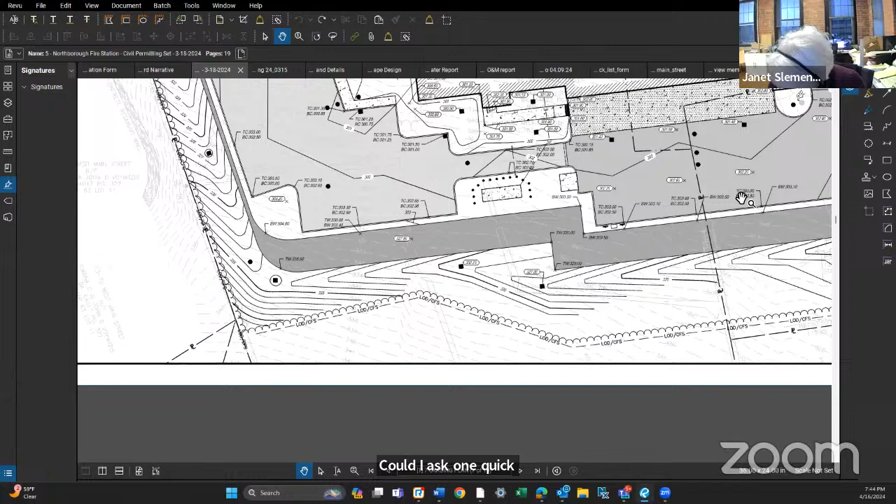Thanks so much. Could I ask one quick question, Carrie? If this Anthony person - I don't know his last name - has any comments, will we receive any of that beforehand? I'm just wondering how that works, and if he doesn't read it till the last minute and then has questions, we might not be able to close it out. I was just trying to think ahead here.

Yeah, so it's Anthony Zaitin. He's a member of the planning board, and I think he could coordinate that through Lori. We're obviously not able to convene outside of our public meetings, but I think directly with Lori is probably the safest bet.

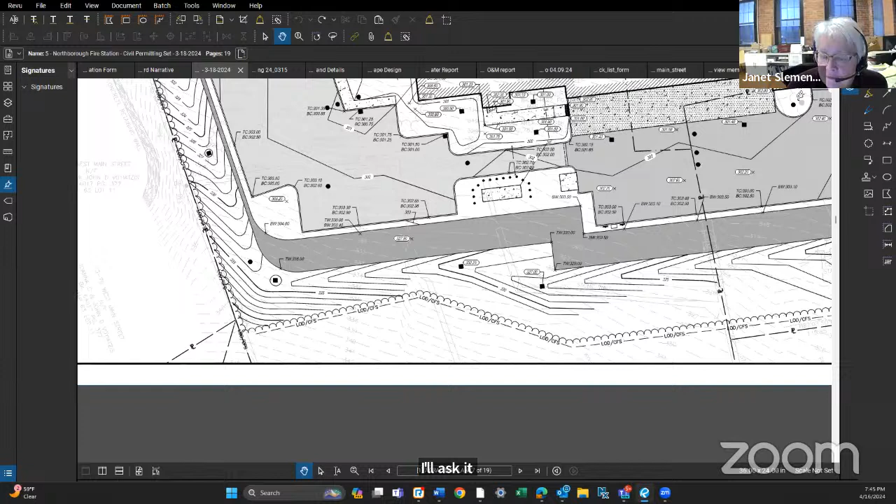Lori, do you agree with that? Is that something he could work through you too? Yes, absolutely. So if he has any comments he wants me to convey to the design team, I will ask him to email those to me, and then I'll forward the email to you folks. I'll ask him to review the meeting and the submittals as soon as possible, because certainly I understand your intent is to close out on the 21st.

Okay, thank you very much. Great. Okay, thanks so much. Appreciate your time.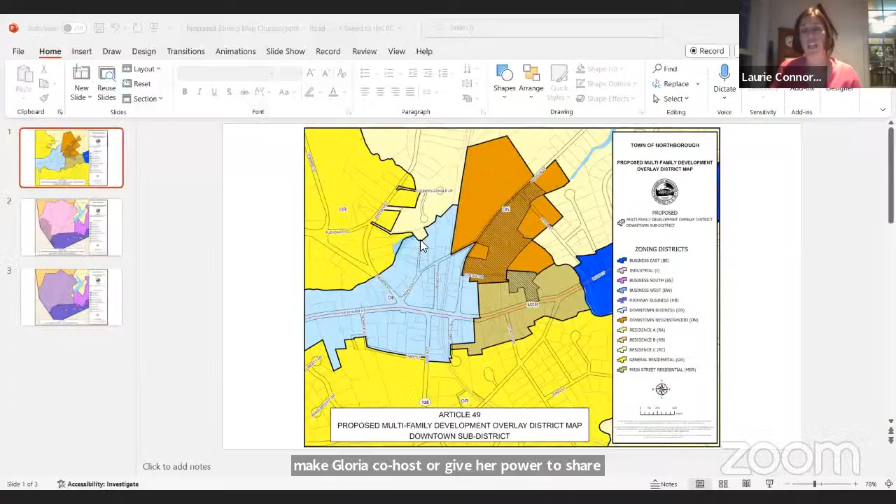So these came in very, very last minute, actually during the meeting, so I haven't had time to review this version, although I did look at it quickly during the meeting. I'm certainly interested in your feedback, so if you think this is zoomed in too much, let me know. When I spoke with Dave, I suggested we have a full version of the zoning map on one side of the page and a blow-up on the other side, so it would be two-sided with two different maps. What he sent me is slightly different than that.

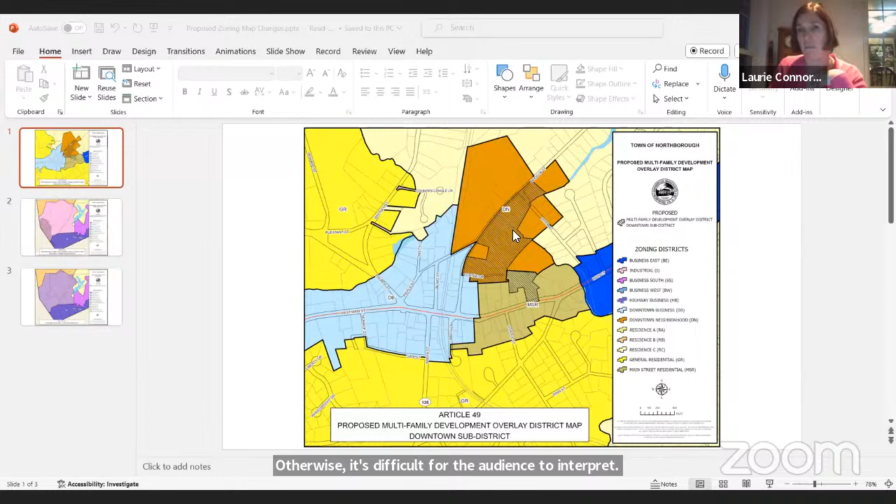This first view is a blow-up of Article 49, the downtown subdistrict. He did the hash marks, which is what I asked him to do, denoting the overlay, and you can see the underlying zoning underneath that. He said it's hard when you project on the screen, so you want it to be relatively simple, otherwise it's difficult for the audience to interpret. I was anticipating making about 200 copies as handouts for town meeting.

So people would have those in hand as well as on the screen. Are there any comments on this specific view before I go to the other two? Is it already printed in the warrant and we just need to let everyone know it's okay? No, this is just a draft he sent over to me. So this one's not in there, but is there a previous version in there? No. I had told the town administrator's office I was waiting for a more professional looking map from GIS, so it wasn't my desire to have the version I previously provided in the book itself. I would print these myself, and those would be handouts on the table.

So when people receive their books, they'd receive these handouts. Comments on this one then? Does this look okay to everyone? Amy, you have something? I was just wondering, could you point out where Harvey is? I have my arrow over it right now. Okay, that's what I thought.

So it's a five-acre piece. This is the town hall property, this is Heritage Village, and the condo development is just to the north of that. Harvey is this big parcel that goes all the way down to Main Street. I asked him to use GIS to calculate five acres because we wanted everyone to know this was five acres. So one of the corrections I'm going to ask him to make is to actually write five acres on here so it's clear.

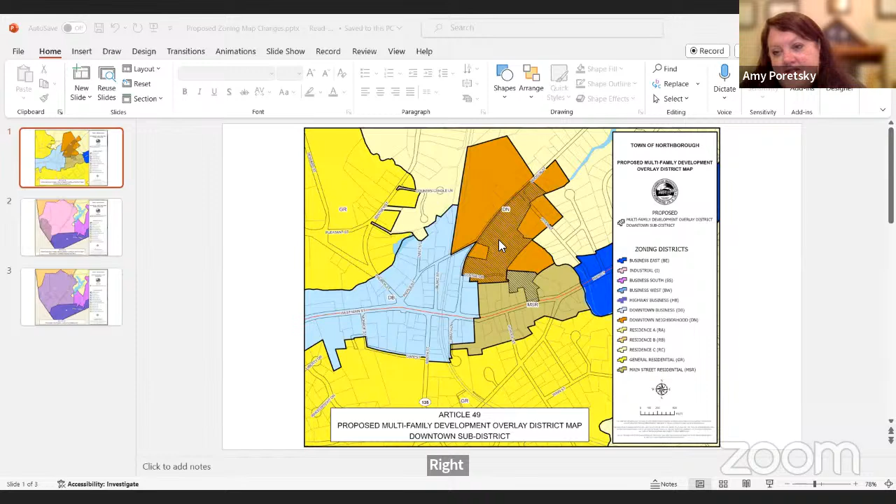I wonder if the underneath property lines could be darker, just so you can see where the property lines are. I can ask him to darken those up. Well, that might be helpful too. Yeah, I think that would be a good idea, helpful.

Other than that, are you folks okay with that? Do you think it's clear enough? I asked him to put the street names on there, so we have River Street, we have Hudson, we have Main Street. I think if Bill shows that other piece that he just mentioned, that'll be helpful to put it into a little better context. And the colors match what's currently the zoning colors are, I'm assuming.

Yes. So it always looks a little bit different printed out versus projected on the screen, but they should match our current zoning now. Yeah, I do.

Okay, so I'm going to go on to the next one. So this is the Southwest Connector Subdistrict. Once again, I wanted the underlying zoning to be clear, so he's showing it as the same line hatch. So once again, he's got the roadways in there.

Certainly you could still use the orthophoto, Bill, in the presentation. We can even do them one after the other - hey, you and I will talk, figure out the best strategy for presenting this so it's clear.

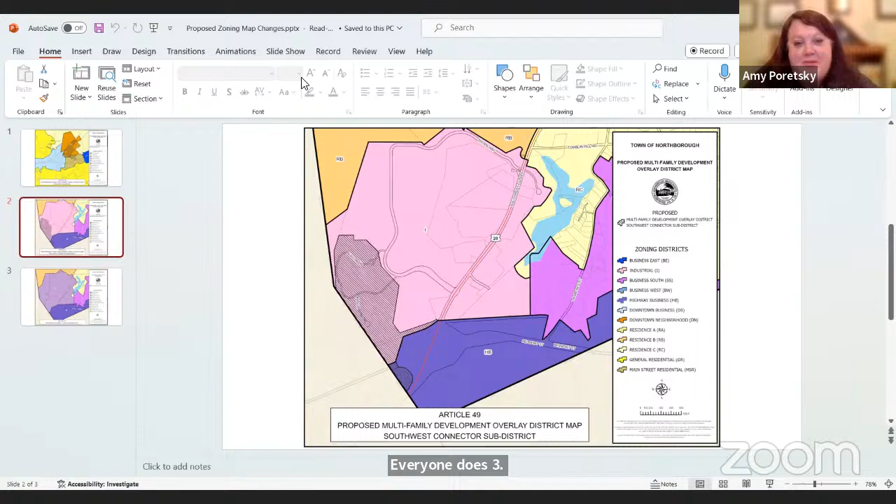Yeah, and I think people might for the most part be okay with maybe some less industrial, a little bit more commercial and mixed. Well, thank goodness in a way, if we're going to have all the overlays -- we'd have the original overlay plus a new overlay. Right, that's confusing. Well, we would be getting rid of the major commercial industrial -- our major commercial corridor.

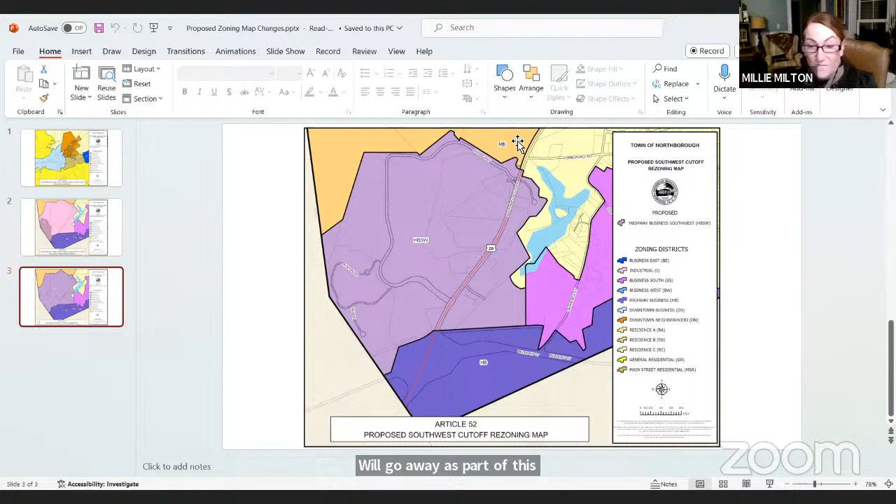So Amy, that's important to point out, that the overlay will go away as part of the same article. Right, simplifies it. Can you type that onto the presentation? That way I know I won't forget. Yeah, I'll put it on the slide after this one, where it talks about highlights of the bylaw.

Okay, I'll have to go back and read that, and I'll have to see which ones I have again.

And then we always get a motion, right? In years past, we get printed motions the night of the town meeting floor. We get a little instruction sheet on how we do it -- we read a motion and then we hand it to the moderator.

Yeah, I'll follow up with the town administrator's office tomorrow to find out when those will be coming. The motions? Yeah, so they asked me to put together the motions, and then town counsel had a couple of minor tweaks. So I haven't received the final clean version of the motion, so I'll ask town administrator's office for that tomorrow.

Okay, and then I can share the instructions again for everybody, the procedures. I'll share this via email as well, but based on how we've done it: we sign the motion, read the motion -- if it's a longer motion you can say as printed in the warrant. It has to be seconded, so we have to wait for that second. We always forget to second each other at the last minute.

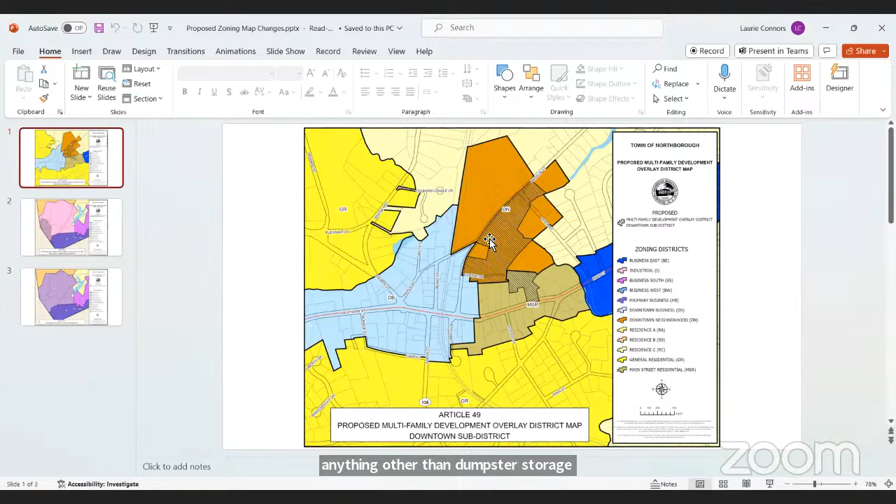But then the amount of multifamily development that would be allowed on that Harvey property, my understanding was that there were supposed to be like 75 units allowed, and they'd be like 3.5 stories tall. Is that still possible, that there could be 75 units if somebody just plainly met the zoning requirement? That's the worst case scenario. So they could end up just doing duplexes or triplexes. Right now, the zoning currently allows up to 8 multifamily units, so this would be a slight expansion over the number of units that would ultimately be allowed.

So if you were to drive up Centerview, Center Drive—that's Heritage Village, right off of Hudson Street—if you were to drive up there, that development is 17 units per acre. So 15 units per acre is slightly less than that. That gives you an idea of what the worst case scenario would be for this striped portion of the property.

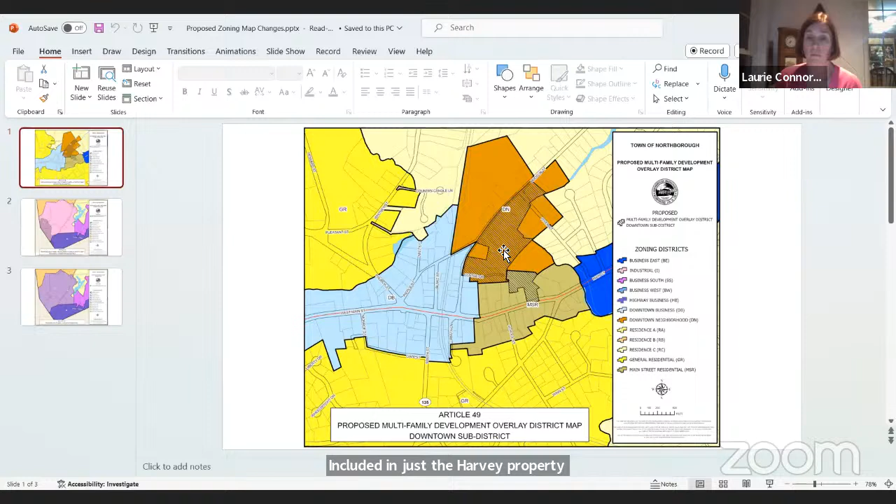Developable - so right now it's currently developed, you've got that big blue industrial building. So what they would have to do is demolish that building and then build apartments or condos or townhouses in their place.

The part of Harvey that's not included there, there's so much wetlands in there, that's not really developable, right? Yeah, so this brown area here is in a zoning district called Main Street Residential. And pretty much the only thing you can do there - there are a couple of exceptions, like you could do municipal uses, and I think you might be able to do a bed and breakfast - but really the only realistic things that could happen there are either single family homes or duplexes.

So much of that is either right up against the river or wetlands, because there's a spring in there as well. Right, and so there's the Rivers Protection Act buffer, which protects 200 feet on either side of a perennial river or stream. So any sort of development would have to go through approval of the Conservation Commission and would be subject to the Wetlands Protection Act and the Rivers Protection Act.

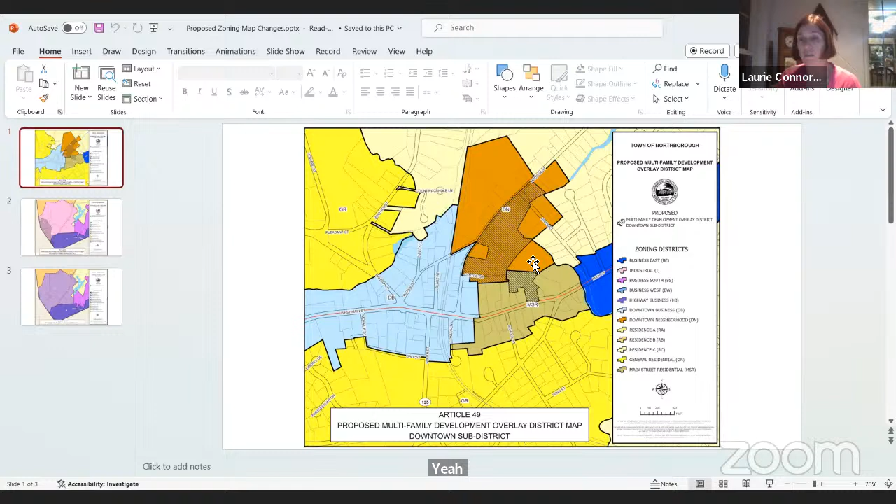And that's just residential. The next section between the MBOD and that Main Street access, there's a lot of wetlands in there. This area right here does allow some mixed use, and it does allow multifamily currently. If it's all wetlands, then like I said, it really cuts down on the development potential of the property. And there's also floodplain in there - yes, definitely floodplain for sure.

Any other comments? I just had a quick question too - so that downtown neighborhood, I don't have it open. Is that 8 units per parcel or 8 units per acre? It's, I believe, 8 units per acre. Let me just double check.

So on top of the 75 units with the lines, the person who bought the whole parcel could also do additional units by using the downtown neighborhood zoning. So remember, you have to build a roadway, so then it would end up being a subdivision in order to get sufficient frontage. In the downtown neighborhood district, the minimum lot size is 10,000 square feet. If you're doing 2-family, then the minimum lot size increases to 20,000 square feet.

Let me look - downtown neighborhood district. So the way the development works, it's based on the minimum lot size. It says for multifamily or townhouse development, there shall be at least 10,000 square feet of lot area for the first 2 units and 4,500 square feet per unit for each unit over 2.

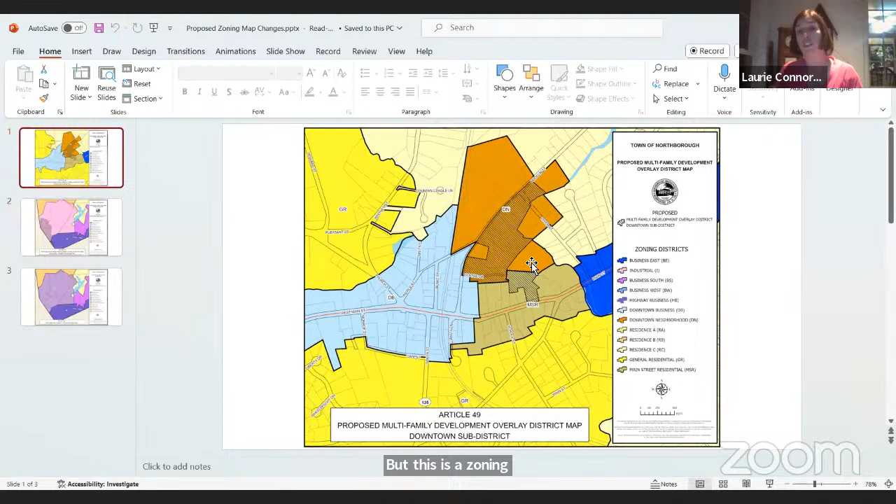So worst case scenario is this, but this is a zoning exercise only - there is no development proposal of any type. And chances are, because of the steepness of the slopes and the presence of wetlands and a river, it is unlikely that you will see worst case scenario. Yep, but it could happen. Even though it's an exercise, it's allowing it by right, so it doesn't mean that it won't happen, because it's going to be allowed by right.

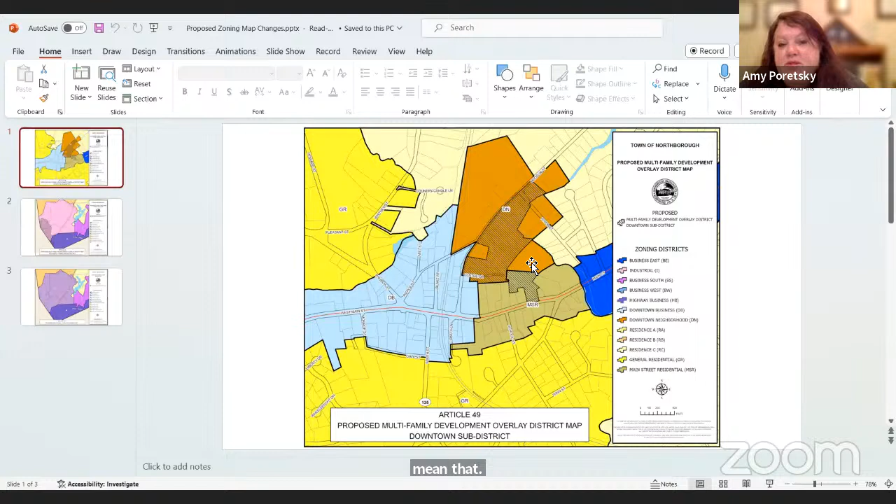And that was the purpose of the exercise. It's still subject to site plan review and all of the design standards that exist in the zoning bylaw, plus the supplemental design standards that are proposed for this bylaw.

I look at what was done on the corner of Main and Brigham, and that was so shoehorned in there, these multi-use units. The neighboring people could practically spit out their window into the windows of the multi-use development that was put in there. So you can say it doesn't look like it's really desirable for somebody to do anything with it, but they do.

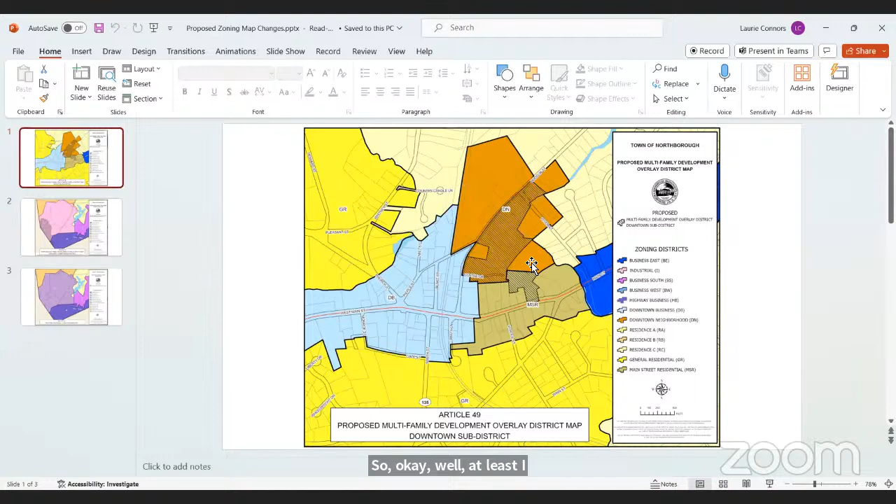And then after the fact, after it gets built, then we say, oh rats, I didn't want that to happen. So okay, well at least I understand what's going on here. And it's unfortunate that it's this close to the actual town meeting, because we're kind of put in a box. We don't have any other choice other than, if we say we don't approve it, then we're jerks, because now the town can't get money and all this other kind of stuff. So we're really put into a box here, and that's unfortunate.

I'm sorry. Okay, I understand what's going on now, though. Great, thank you.